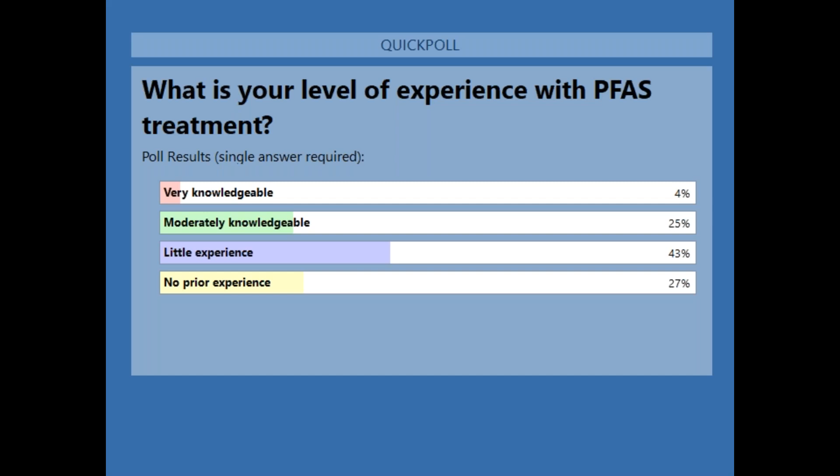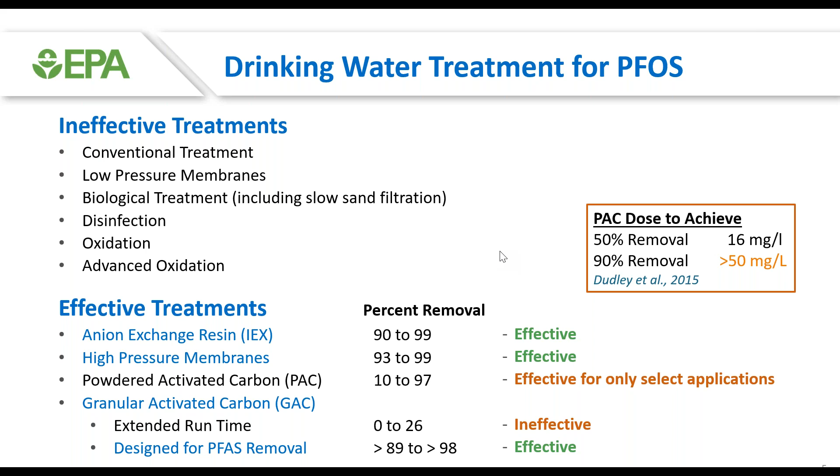But if you're just above the MCL and wanted to drop it down, say 50%, it could be an option. And there are other PACs out there too. If you go to the literature, you can find like super fine PACs that could be used that increase the kinetics of adsorption, and you get better results because it takes it out quicker through your process, and your ultimate capacities are higher. But there is some literature out there on this issue. Just a little bit. Next slide, please.

And then as this is all going on, you can have competition between different adsorbates, natural organic matter that's present that can block the pores or preload onto the carbon. One could even see biological films growing on the outside of the carbon if it's been in place for a fair bit of time. And also at the top part of the carbon, if you're having iron and manganese issues, you can actually plate out iron and manganese on the top part of your bed, which can cause you problems. And hopefully you won't have to backwash. But those are some of the factors that come into play.

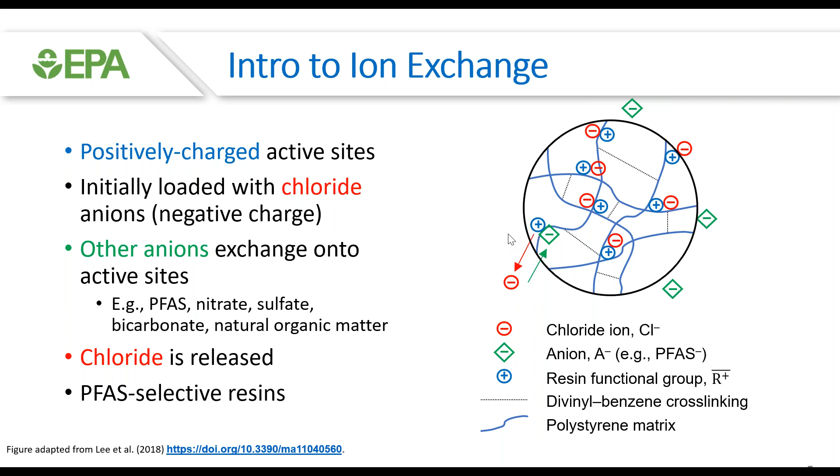However, you can have other constituents like nitrate and sulfate and organic matter that exchange with the chloride also. And so you can have some competition with the absorption. And it depends on what concentrations those are and then what comes into play. But the big ones to look out for are nitrate and natural organic matter. They've shown to be a good or a bad, if you look at it that way, competitor against PFAS absorption with PFAS selective resins. Next slide, please.

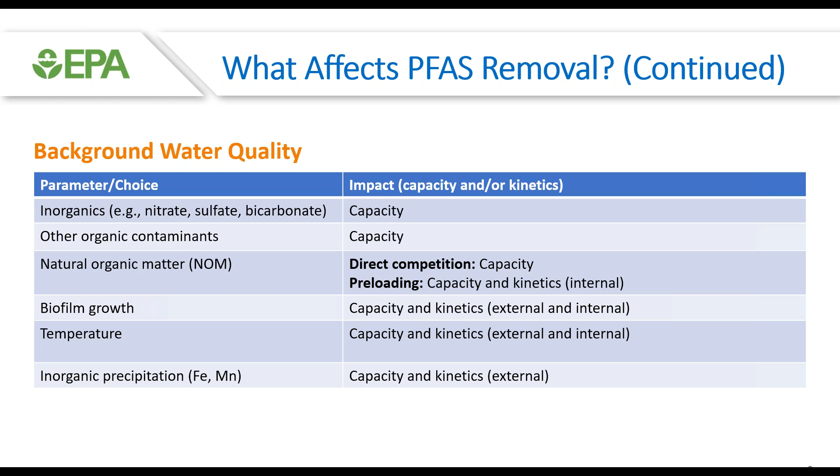For instance, temperature is an issue you usually just can't get around, but GAC works better in colder water than warmer water, just because it's an exothermic reaction, and it favors adsorption in colder waters. Next slide, please. So a little bit about GAC and ion exchange and kind of how the two compare.

So the granular activated carbon empty bed contact times typically range from 5 to 20 minutes, depending on what needs to be done. And the hydraulic loading rates are usually around 4 gallons per minute per foot squared, or 10 meters per hour. And so those are the standard kind of designs. Ion exchange usually has a much lower empty bed contact time, 2 to 7 minutes, and it has a much higher hydraulic loading, up to 8 gallons per minute per foot squared, or 20 meters per hour.

And so what you see is that for some utilities that are very space limited, ion exchange could be a good option if they just can't afford putting in another building, or if they don't have the floor space. And some utilities see ion exchange, assuming that ion exchange works for their mixture of PFAS and their water quality, and they're also integrating into their current system, making sure that all works out correctly. Ion exchange has that benefit of being a much smaller system physically.

And so, however, you should be careful about choosing between the two, because out there in the literature, there's a fair bit of stuff saying one is better than the other just because it has a higher capacity. And that's generally not true. It doesn't have to be true, because granular activated carbon is much cheaper in terms of cost, and in many applications it can be the optimal choice. So one would have to look at it fairly closely to see which is best for any given utility.

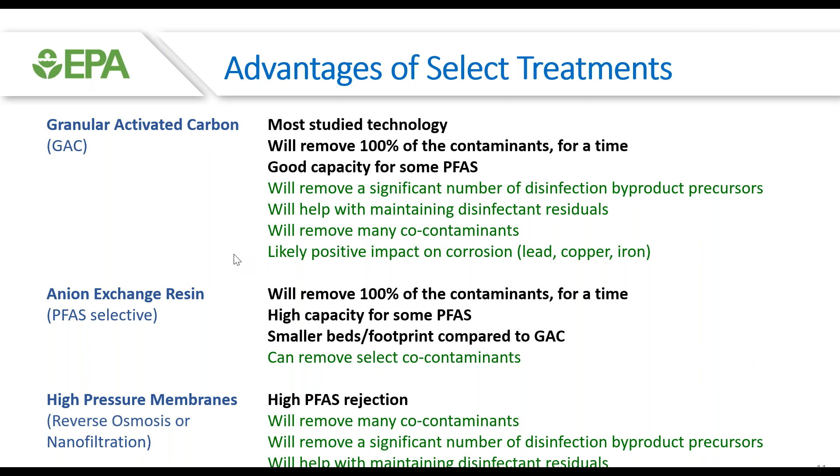Issues to consider with these three technologies. Thank you, next slide. For GAC, reactivation frequency can be very short in some instances, and a utility may find that it's just not functional to have to exchange a bed every month or two. Logistically, it would be a challenge, and it also indicates that it would be very costly in that instance.

With GAC, you can get potential overshoot of poorly adsorbing PFAS, so the weaker adsorbing PFAS can be chromatographed. Oh my heavens, I've said this my whole career and now I can't say it today. It can be pushed forward by more strongly adsorbing PFAS, and what you see is that you can actually get a concentration in your effluent higher than what's in your influent, and that can be disconcerting. So you'd have to keep track of that and make sure it's not going to cause you a problem if that PFAS is a regulated contaminant.

Backwashing for PFAS shouldn't be an issue because the bed stratifies. You wouldn't want to backwash a lot. Usually this is a deep bed adsorber after a particulate removal, after sand filtration. Hopefully you won't have to backwash, but you can backwash and it shouldn't be a problem.

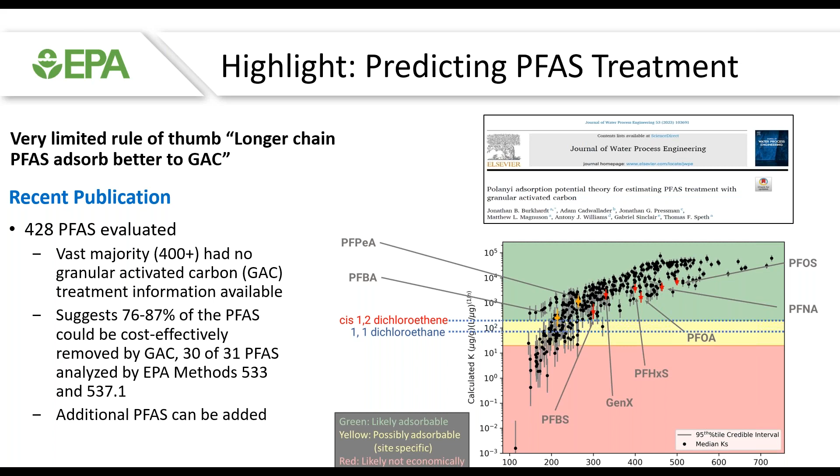But the take-home message on this slide is that if you're looking at a huge range of PFAS, and this correlation could be used for even more PFAS than the 428, carbon will not remove all PFAS. There will be some PFAS that are very weakly adsorbing. The good news is that they're not regulated, and we don't have any health information regarding most of them. But it will remove 76 to 87% of the PFAS we've looked at. So it's a very good technology, but it's not necessarily spot on. And we know of some PFAS that are difficult to treat with GAC, such as PFBA and others that come through very quickly. Next slide, please.

One thing to note is for the non-regulated PFAS and other contaminants that aren't a health concern, one can model these breakthroughs with the current models, and that gives you a much better feel for what the competitive effects are in your water, and you're able to model the expected breakthrough of your more strongly absorbing PFAS that we are concerned about, and it is very helpful for utilities, we're finding. And if you ever need help with that, let me know.

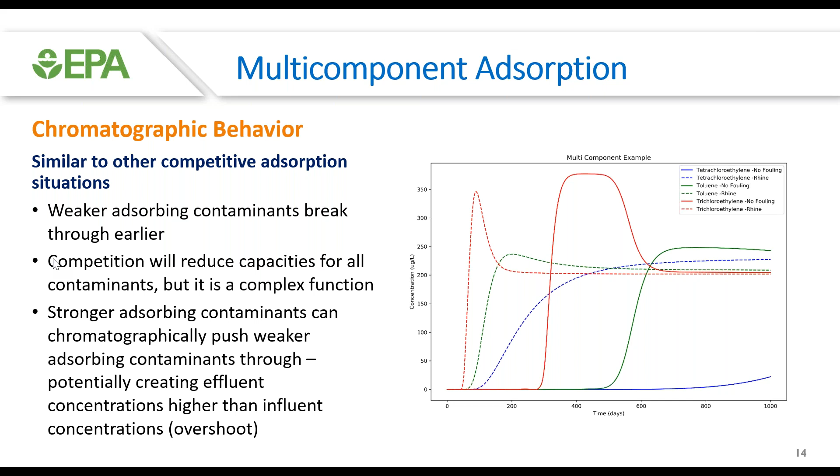A little bit about column configurations. Single columns are often used. However, you lose some of the potential absorption capacity on changeout, because you can only run it as long as you're below the MCL.

You can run staged parallel systems where you start the systems at different times, and therefore you can run the first bed out longer because while that may be above the MCL, you're blending it with water from other columns that are below, at zero. You can maximize your GAC capacity on the first column before you take it off to reactivate it.

Lead lag systems are systems where you have two in series. You fully load the first one, or as much as you can, while the second one catches the PFAS before it reaches the distribution system. Once the first column reaches its high capacity, you take the second column and make it the first, adding a fresh column on the back end as your second, rotating along with valving so you maximize the PFAS absorption capacity.

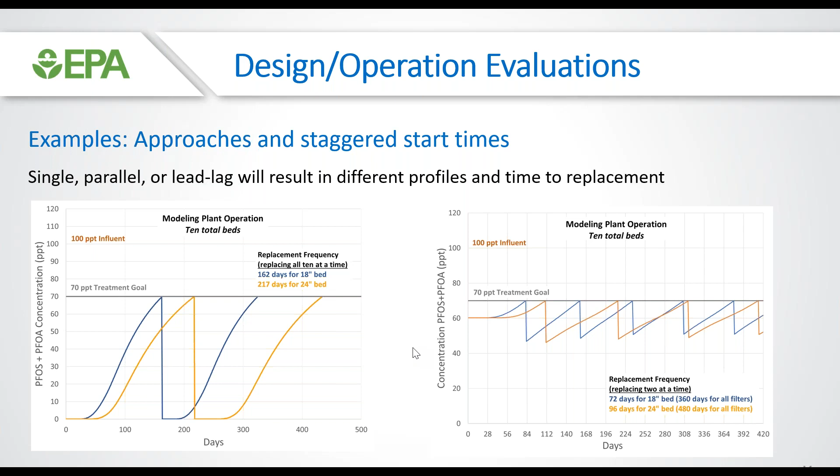Okay, let's talk—next slide, please. I'm sorry, I think I missed the 'next slide please' a couple times, so I apologize. Next slide is the high pressure membrane slide, slide 17. High pressure membranes use pressure to push water through a membrane. You're fighting against the osmotic pressure. The good news is that RO membranes, or very tight nanofiltration membranes, are very effective for rejecting PFAS.

Next slide, please, slide 18. As I mentioned, PFAS rejections are very high for reverse osmosis and nanofiltration membranes, but ultrafiltration and microfiltration, which are used for particulate removal, do not give you PFAS rejection.

The membranes will foul over time, and most systems will add an anti-scalant to prevent fouling or keep it at bay for a period of time. A utility will likely have to do periodic cleaning with a detergent, acidic, or alkaline solution based on what's fouling their membrane. Surface waters, as I mentioned before, foul to a much greater degree than groundwaters.

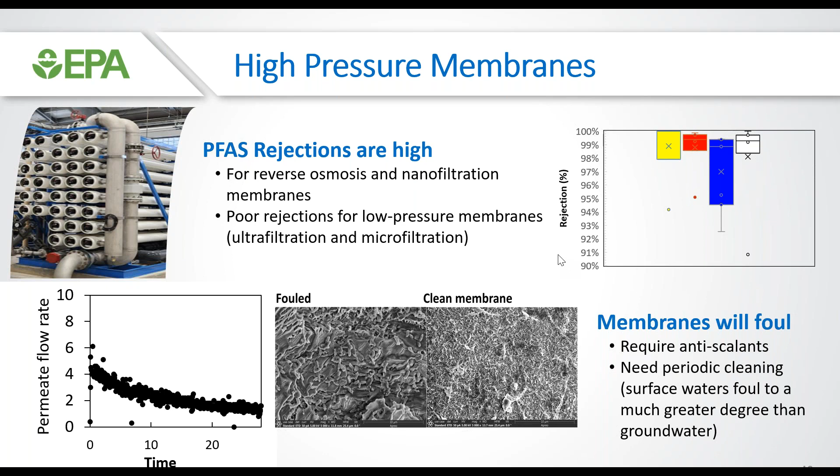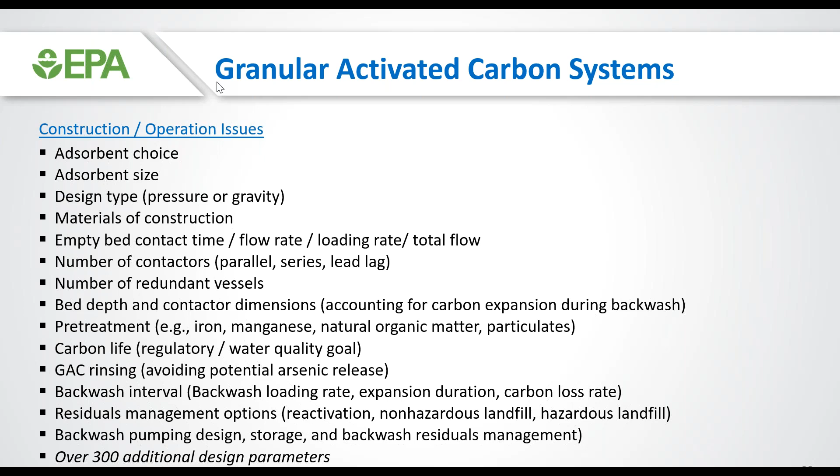So the take home on these three slides are know what you're getting into, all the issues that affect flux or flow rate or absorption. All these things you'll need to know, and you need to know the answers on all these before you can get into the ultimate cost modeling, which is really the only way you can somehow compare these technologies, unless you're running into a utility that has a specific issue that they have to address that really leads you one way or the other. For instance, the space issue for like ion exchange.

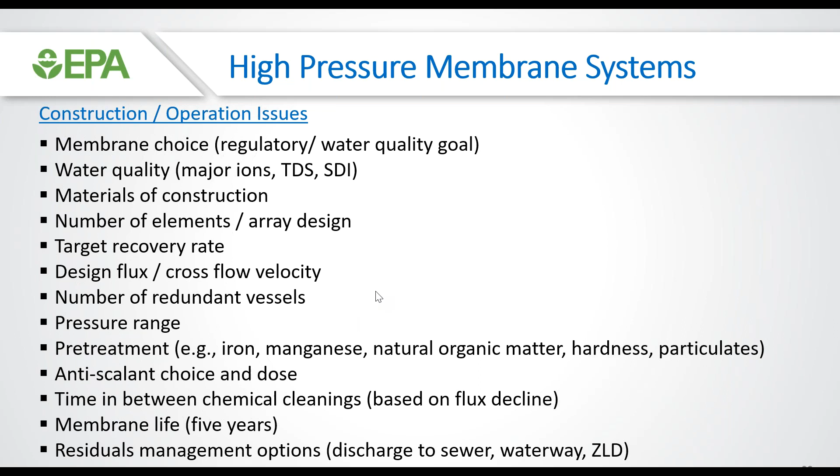Next slide, please. Now, some of these systems, for very small systems, for flow under 1 MGD, you can save money, even though the cost of treatment per gallon treated is higher. You can save money on very small systems because you might not need to do certain things. Like you may have more residual handling flexibility, or you might be able to use a pre-constructed building that you can put in place. You might save space. You might be able to save a lot of space between vessels, and you might be able to use smaller vessels. You largely don't have as much instrumentation for small systems. They oftentimes can be designed with no booster or backwash pumps. You can get away with smaller concrete pad thicknesses and reduced indirect costs. So there are savings for small systems.

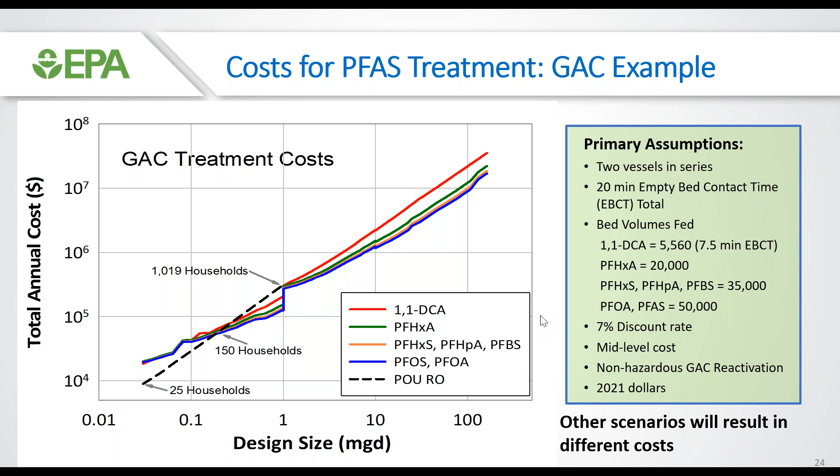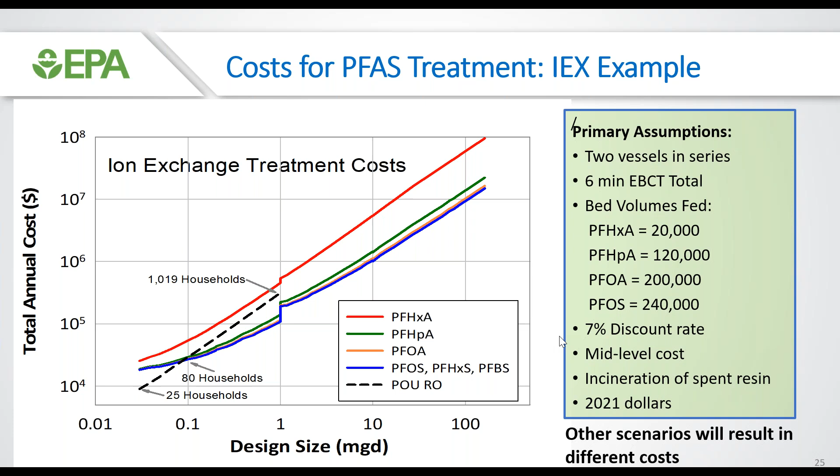Next slide, please. Now, as I mentioned, RO could have a concentrate stream that might have to be handled, or other aspects in terms of things. We are looking at a whole bunch of other technologies, and this is a teaser for the next presentation a bit. If you're adding in multiple technologies, the cost is going to get very high. But there might be some niche in some application where you can put together multiple technologies.

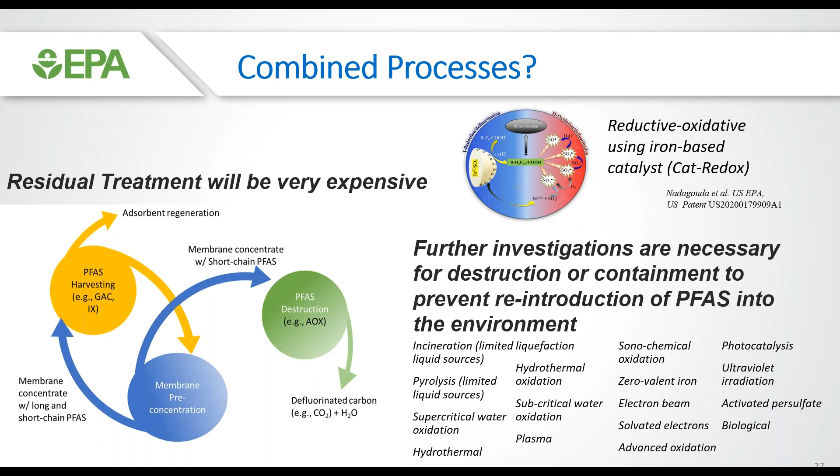Oftentimes systems are put in and built, and then they're sampled for regulatory purposes, but it doesn't give you as much information as you could need for optimizing the operation and maintenance. And then we'll also work with the utilities on their residual stream handling. The goal for us is to develop enough data across the country to develop tools for performance and cost models, make sure the cost models are working correctly and performance models are working correctly, and then to link all that data and materials and tools so that people who have communities with similar water qualities and situations could use the information from our studies set of utilities into the future for the optimization of PFAS removal in terms of operation and maintenance.

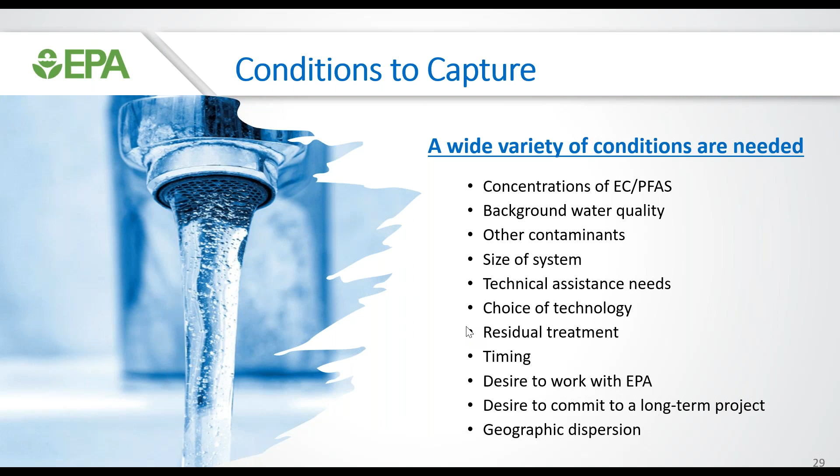So the benefits are that the community gets a whole lot of data on optimizing their system and knowing their system, and then access to tools that are trained on the data from their system, and direct access to EPA technical experts that can help run models for them and go through all the issues that they have an interest in. They could also use the final data for finished water. It's state dependent, but the states we've been working with are fine with it, because it's done in a certified laboratory. They could use the data while we're working with them for regulatory purposes. And if they want to collaborate on publications, especially for those of the local community, EPA will be glad to work with them on those publications.

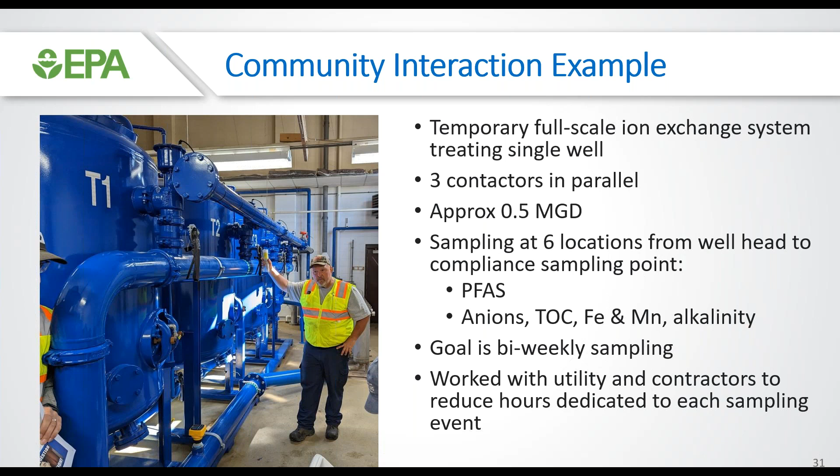Next slide, please, 31. Here's an example of a utility in Wisconsin we're working with. It's an emergency full-scale ion exchange treatment that they've dropped in place for a well, approximately 500,000 gallons a day. We're sampling bi-weekly. We're able to sample the system. We found the early breakthroughs of the early breakthrough contaminants. They were originally worried because they were going up and down and above the initial concentrations. But when we modeled it, it all fit perfectly. And based on that, we've given them a real good feel for how long these emergency systems will last for them. And it's helping them with their final design for their system in terms of where they're going.

The next slide, please. This is just a slide, and I'll go through this quickly because I want to hit the next talk, in that any system that can access the Drinking Water State Revolving Fund is available to this program if you're interested. Give me a call. Even tribally owned systems are eligible. They can use state revolving fund monies. Oftentimes they don't, because there are other funds available. But any system, even say schools and other very small systems that can utilize the state revolving fund can be part of this program. Next slide, please.

And here's just a few places that we're starting. We're starting in Wisconsin and North Carolina and Ohio. We've got systems in Alaska and out in Guam and Northern Marianas Islands. Those systems we're doing a lot there, and the very remote systems we're working with the residual handling especially because they don't have the ability to ship back spent media, and they also don't have natural gas for reactivation furnaces, so we're working with them on their residual handling needs.

Finally, just to wrap up very quickly, the GAC, ion exchange, and high pressure membranes can remove PFAS. There are a lot of other issues. I could talk about this for a long, long time, and as you can see, I'm running even a little bit late here. But there are a lot more issues to talk about, and I'd be glad to talk about it with anybody who has any issues.

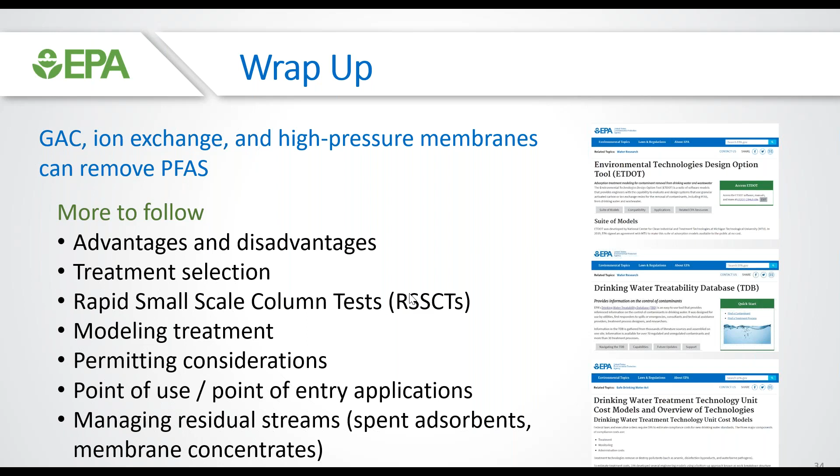So the next slide is just a disclaimer and then questions, but we'll move to the next talk, which I can wrap up in 15 minutes. That shouldn't be a problem. So if we can go to the next slide. Yes? Hey, Tom, it's Hannah here.

While Sarah gets your presentation ready, we've only had one question in the chat, so I think I'm just going to go ahead and ask you now. And I'm also going to send it in our Google Meet so you can read it if you want to see it. But it's from Robert.

He says, in my experience with GAC, we have seen coconut shell media have pesticide and herbicide concerns, and bituminous sourced GAC have metal issues. Can you comment on this?

Yeah, sure. So coconut shell carbons have largely been shown not to be that great for PFAS. I think the pore structure is such that at the end of the day, the more standard bituminous GACs, like the F400 from Calgon, have been basically borne out to be the most optimal for PFAS removal. Pretty much everybody agrees to that.

There can be some minor nuances between one slightly different bituminous carbon and another, but a bituminous-based carbon is the way to go. With regard to metal issues, I think you're referring to, say, arsenic issues. Bituminous-based GAC, because it's a natural product, can have arsenic present in it. We've known this ever since I started in the mid-80s, and it can be very easily handled with an initial flushing.

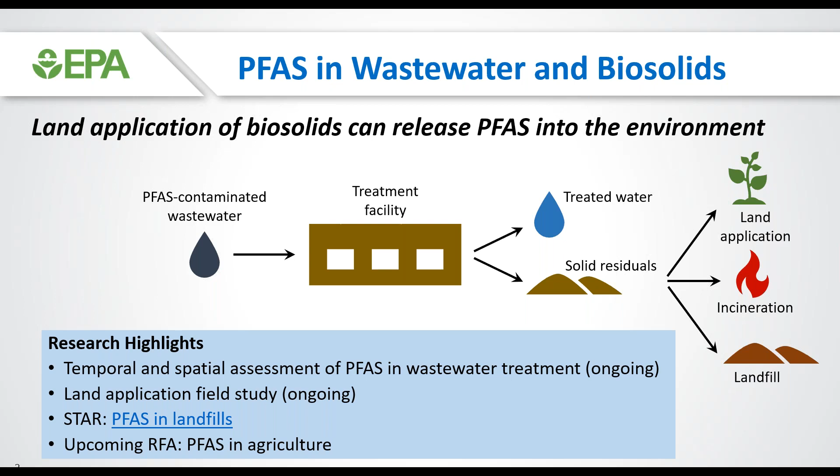Here's a little bit of residual streams, and if it ends up going to the wastewater plant, just note that the shorter chain, or hydrophilic, PFAS will end up in the treated water. The hydrophobic longer chain ones will end up in solid residuals, which then find their way to incineration, land application, or landfill, and you can start the cycle again if you're not very careful.

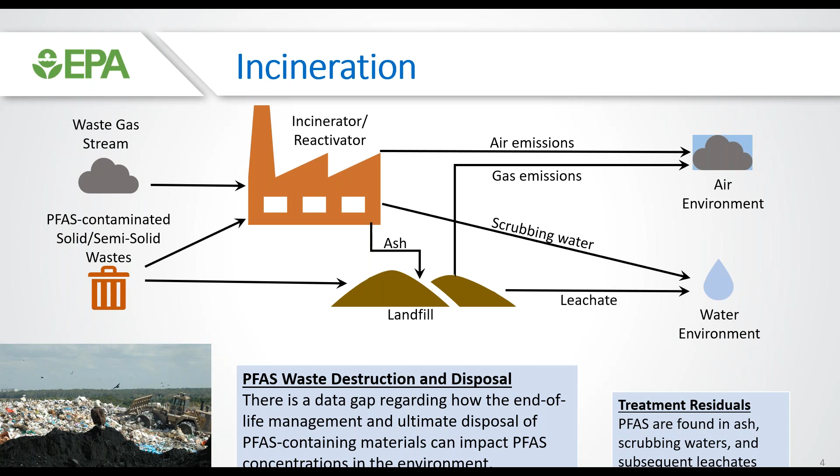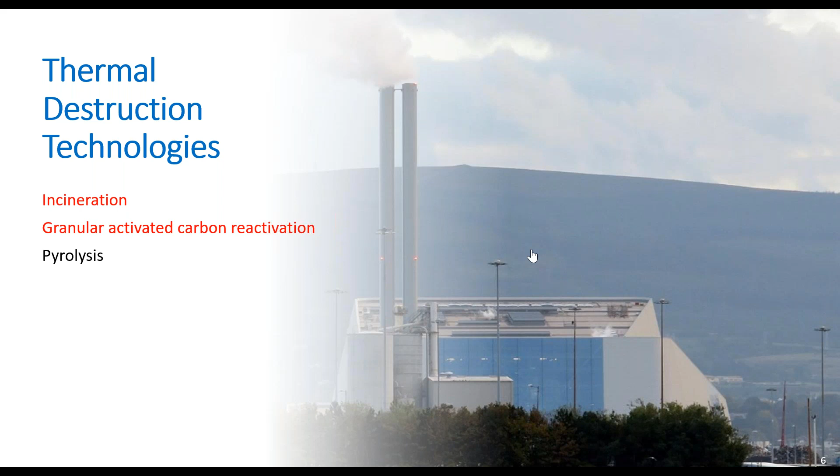This is just a little bit about thermal destruction technologies, and I'll be concentrating largely on incineration and reactivation. Next slide, please. Those are covered in the thermal treatability database at pfast.epa.gov. If you get to the database, you'll be able to see the reference information on the treatment of PFAS in thermal processes. We don't include things like SCWO and HALT, but largely the processes that specifically use heat to destroy the PFAS.

Next slide, please. Why that's important is that the carbon-fluorine bonds in PFAS are particularly strong, and the most difficult one to destroy is carbon tetrafluoride, which requires about 1400 degrees C to achieve 4 logs of destruction. That, along with C2F6, can be used as potential surrogates in a thermal system. For the regulated PFAS, we're looking at numbers somewhere around 1100 degrees C for a good percent reduction without PICs. And that's the key here: we don't have a lot of field data, and the field data is lacking a lot of information on products of incomplete combustion.

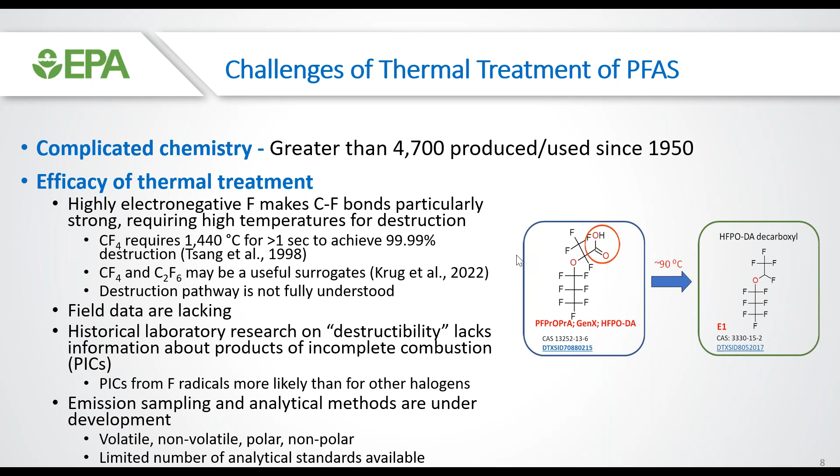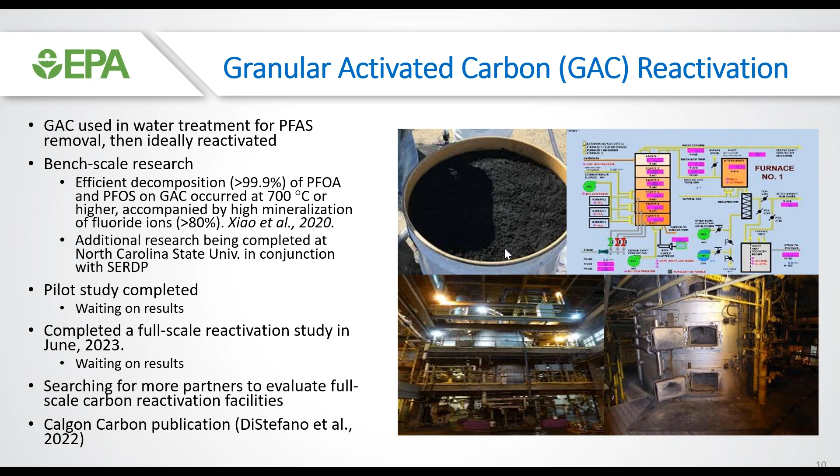As an FYI, Calgon Carbon published last year on reactivation of GAC, largely for the known PFAS. And if you're interested, it's that DiStefano reference. Okay, next slide, please. A little bit now more about managing PFAS. And this is a paper that was done last year, and I'd recommend it.

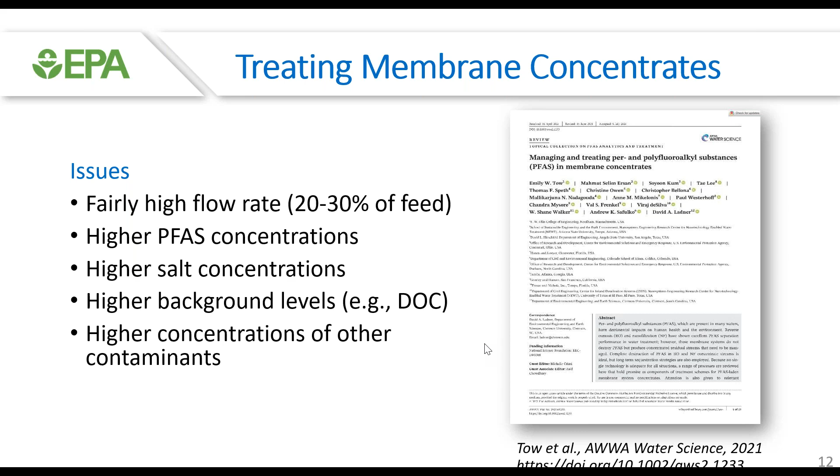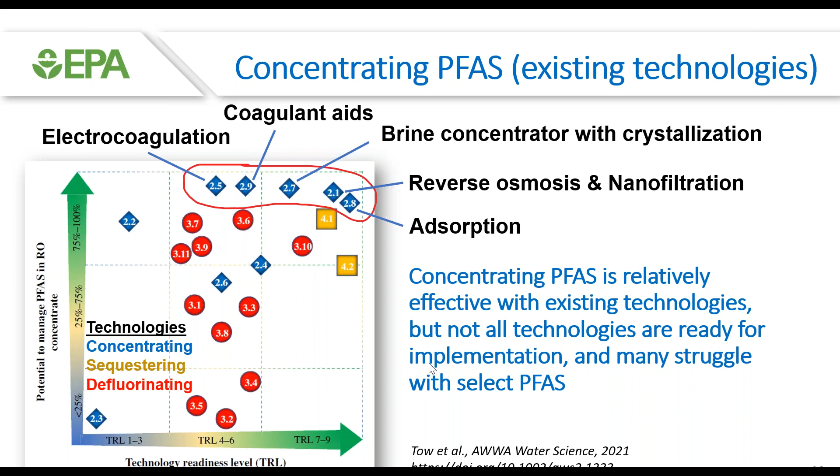Next slide, please. We know that concentrating PFAS with adsorption, reverse osmosis membranes, or more unique membranes, membrane distillation, or forward osmosis, those kind of skew along the range of whether or not it's ready or not. But it can reduce this issue of concentrate treatment. And you can get into brine concentrators and crystallization, heading towards zero liquid discharge. And also, as you go down the list, for things that aren't quite ready yet, is electrocoagulation and coagulant aids. But if you're looking for treating the RO concentrate, the first one on the list is either using other membranes to concentrate it even further to the point where you can manage it, or use adsorption of one type or another. The advantage is you can use a more novel adsorbent that maybe isn't NSF certified for drinking water for this capability.

Next slide, please. For treating other types of concentrating factors, the other blue ones, you get into evaporation ponds, foam fractionation, which is moving forward fairly quickly now. The question with foam fractionation is at what concentrations is it really effective in the system, and more data is being generated on that. And then you have other things, and I mentioned this before. I mentioned it skews with some of the other membrane systems for membrane distillation and forward osmosis. They're not quite ready for prime time, so they're further there on the left. And on the very low bottom end is electrodialysis and RO hybrid systems. So that has a lot more to go before one would consider that.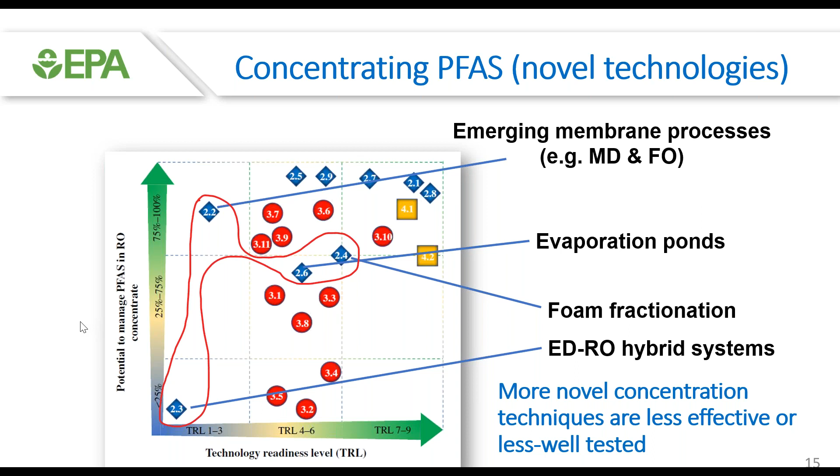Next slide, please. This is just foam fractionation for those that don't know. You bubble air through your water in one way or another by pulling a vacuum or pushing air through it. And it's a lot like air stripping. And PFAS love to be at the interface of the air to water. And so when they get to the top, it foams up in a sudsy foam, and you can kind of scrape it off or suck it off. And that can be very effective, especially for long chain PFAS, and could be used as an RO concentrate treatment, or if you have an extremely high concentration in your well, you might be able to use it as a pre-treatment to your primary treatment system. And that's probably more for cleaning up hazardous sites as opposed to drinking water systems, because the concentrations do need to be high.

Here are the defluorinating PFAS technologies. So incineration, plasma-based treatment, sonochemical, electron beam, supercritical water oxidation.

Incineration is possible, but you can't incinerate 30% or 20% of your feed flow rate. So you're going to have to knock it down for that. And the other technologies aren't quite ready for prime time. But it can be helpful, but none of these technologies are 100%, not even electron beam where you're just zapping it with electrons. Next slide, please.

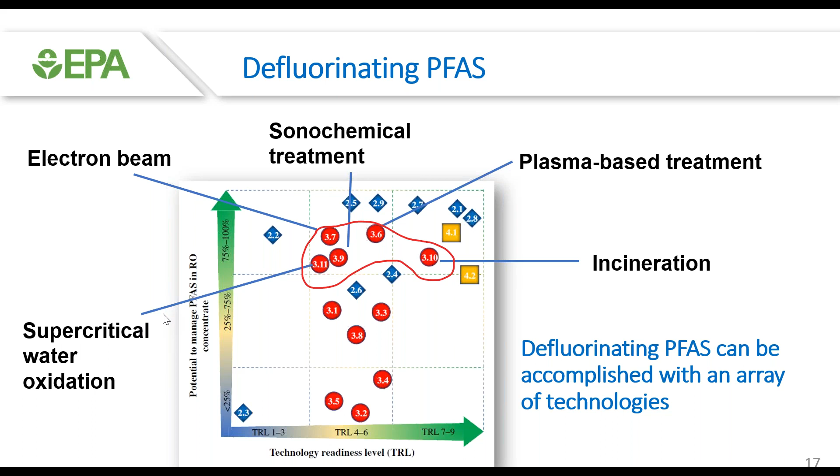Supercritical water oxidation is something that's very promising. We don't know about it in terms of an RO concentrate stream. That's a continuous stream. But for batch type streams or very low flow rates, it could be possible. We've piloted it in a number of different situations, and we're going to be running one shortly, looking at sewage sludge actually. But it's a promising technology, but not necessarily for RO concentrates.

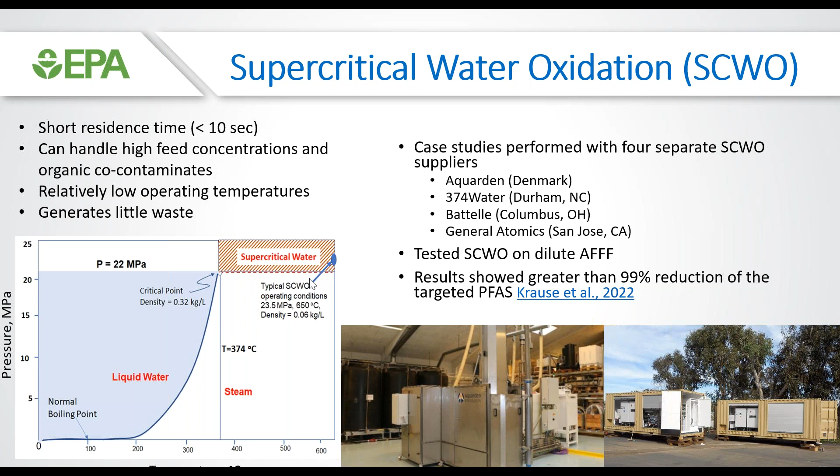Electrochemical oxidation. This is another technology, as you can see by the picture. It's just being worked on largely at the bench scale. There are some piloting systems out there, but we've tested it. It seems to work well for certain PFAS. There are always breakdown products on that. And so that's another technology that's being studied.

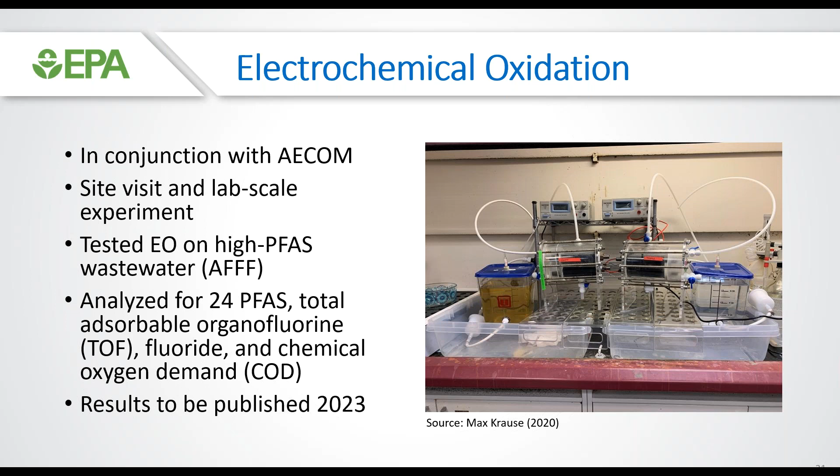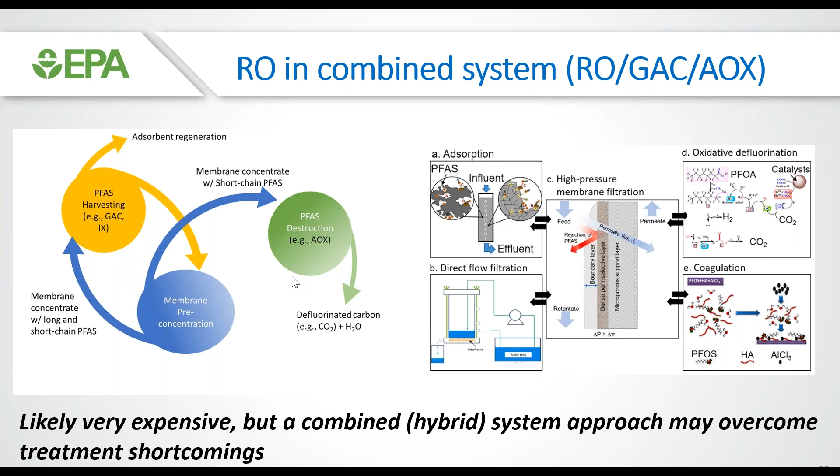So I'd like to just now acknowledge the next two slides as my EPA co-authors, and then the co-authors on that paper that I referenced. And then it just ends up with a disclaimer and the questions. So I apologize for kind of going through this. As you can tell, I could probably talk about this topic all day long. And I hope it's been valuable to you. And I know there'll be a time at the end of the whole thing that we could answer more questions, and I look forward to that.

Thank you, Tom. We do have one question that's come in, and since we are just a couple minutes late, why don't we go ahead and do that one now? Hannah, would you be able to read that one, please?

Yes. Hi, Tom. We have one more question, and the question is, when GAC is used for PFAS removal, is there any data to show what happens to PFAS during the GAC reactivation process? Is it completely removed during reactivation? And I'll go ahead and share this in the chat so you can read the question as well.

Yeah. So we've looked at that a fair bit. On the bench scale work, we funded a couple of universities to do this work, and are continuing it. At the bench scale, it shows largely all defluorination to hydrofluoric acid. But at the bench scale, it's a very controlled system, and you can kind of get those results. But the good news is that it appears very clearly that activated carbon, when you heat it up to reactivation temperatures, which are below 1100, the functional groups on the activated carbon work as kind of a catalyst to help destroy PFAS.

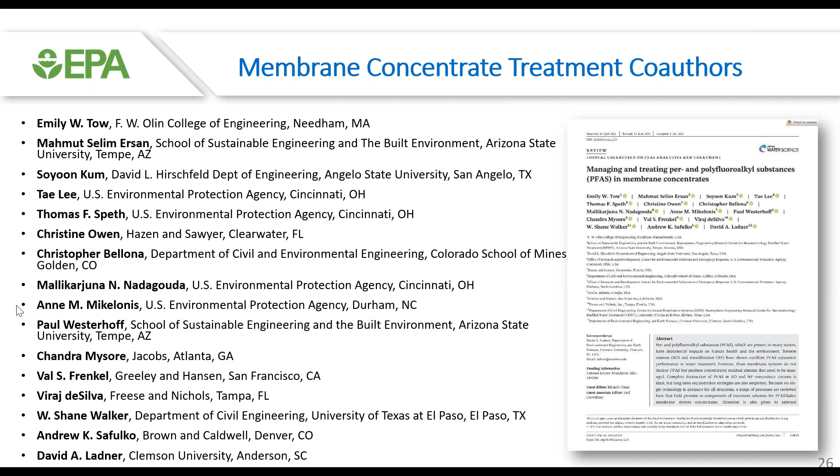All right. All right, Yasmina, are you there? I don't hear you. Yasmina, are you having any issues? Are you muted, Yasmina? I'm still not hearing you, Yasmina. Okay, looks like Yasmina is going to come in again. She is our speaker for the next 2 hours, so let's give her a minute to see if she can get back on. If not, we may take our break a little early and troubleshoot here.

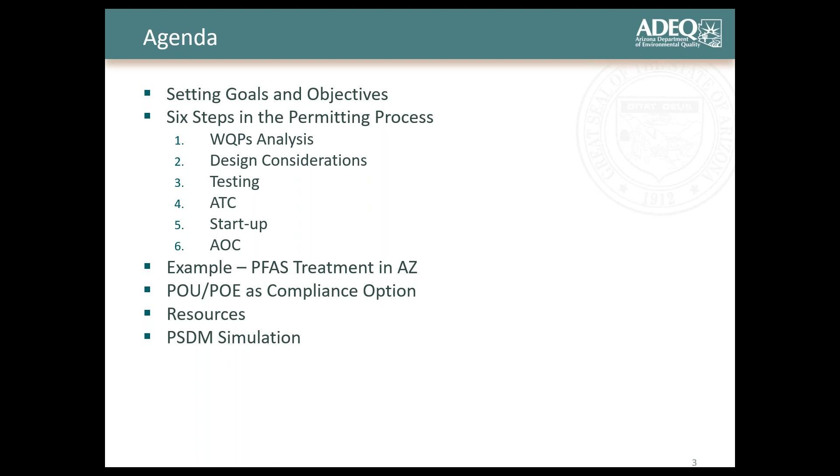So let's get started with goals and objectives. I found it important to step back here and say that before starting to think about treatment at all, be aware that treatment is not always the best approach. Non-treatment alternatives such as consolidation, interconnection, or deeper wells may be a better option. And here are some reasons for that. So these non-treatment alternatives can be faster, more cost-effective, and more sustainable. You will not have a long-term O&M consideration to think about, or limitations for technical, managerial, or financial capability, as in the case of treatment.

For purpose of this training, I will assume that non-treatment alternatives are already explored, but for some reasons not working for you, and you are starting to think about treatment options. From ADEQ point of view, high level of PFAS treatment goals are long-term compliance and simultaneous compliance.

We understand that there are both positive and negative specifics related to PFAS. So while we have known treatment technologies and grants are available to support robust design, certain gaps do exist. So this is still new contaminant for us. We are dealing with very low concentration, so we are basically targeting non-detect. And there is a general lack of experience in all the fields related to PFAS.

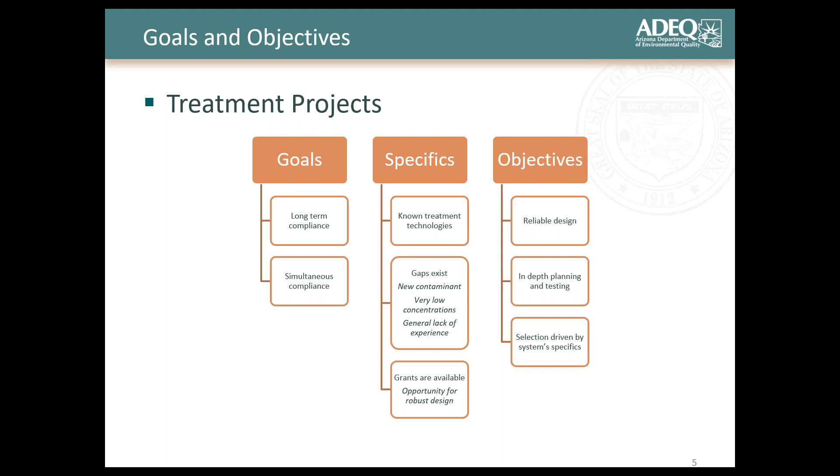So in order to meet goals in line with these listed specifics, we see 3 main treatment objectives. First, design must be reliable. Second, in-depth planning and testing is needed. And third, selection should be driven by system specifics.

After all, treatment selection shall be driven by system specifics so that final product is reliable and easy to operate, and it should avoid and prevent foreseeable mistakes. And of course, it should be cost effective. But when we say cost effective, it's not only about the capital cost, but you also have to think about balanced capital and long-term O&M costs.

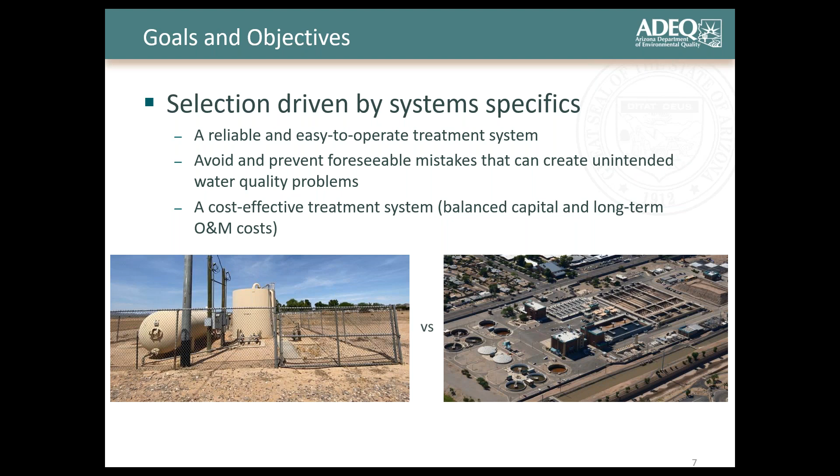So in Arizona, we have very small rural systems, such as the one on the left side, but also big ones shown on the right. While they may have same PFAS issues, their optimal treatment selection and design will not be the same because of their specifics.

I will now start with permitting process. And even though this process is nothing different than what we have for any other treatment and contaminants, I will show here a recommended cadence of activities needed to meet minimum design criteria, with emphasizing differences specific to PFAS.

So you're all familiar with ATC and AOC steps in ADEQ permitting process. However, there are activities that you do before and in between ATC or AOC, and I will talk about all of them. So our goal is that you come prepared for ATC or AOC so that you do not risk denial. And that's why, in addition to these general type trainings, we highly recommend scheduling pre-application meeting with us where we can answer all of your questions and determine if your specific project is ready for ATC or AOC submission.

So first activity on previous chart is analysis of water quality parameters. This should not be surprising for anyone because you have to know what you have in your water in order to plan how to mitigate that. Questions that I thought that may arise specifically for PFAS as a new contaminants are what to test, where to test, and how many tests to do.

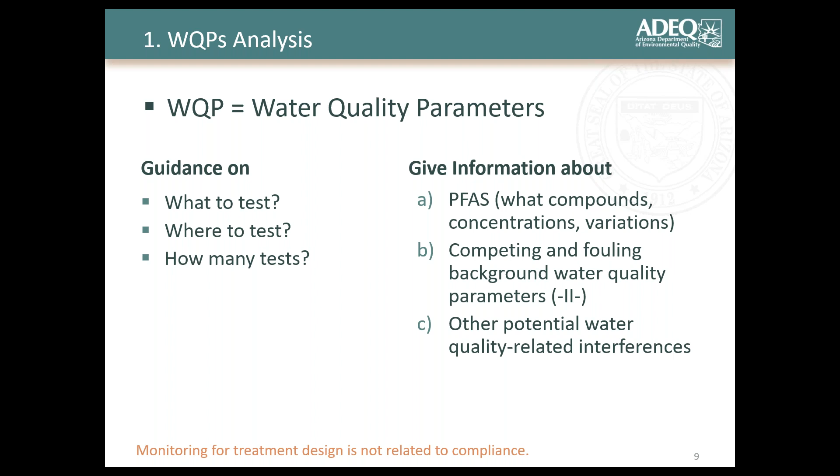And you have to know answers on these in order to provide crucial information for your design, such as what PFAS you have, what compounds, in what concentration, and what is the variation in them. Then beyond the PFAS, you have to know the same for competing and fouling background water quality parameters. But even beyond those two groups, there are other potential water quality interferences that you have to test for. So let's focus on PFAS only.

There are three things that you have to know about PFAS in your water. First, you have to know speciation. And why is this important? It is important because you have to make a difference between short chains and long chains, because longer the chain, stronger the hydrophobicity and lower the mobility. So that's why you can see that it is easier to remove, general trend saying that it's easier to remove longer chains than shorter chains.

Then you have to know what's the functional group that you have in your PFAS, because stronger the head charge, it's easier to make the bonds with media. And I guess I can give here one example. You probably already know that it's much easier to remove PFOS in comparison to PFOA. So there is only that functional group that makes difference here. So it's very important to know which one you are dealing with, what you are targeting.

And then you have to think about the potential for future regulations. You are screening for 29 compounds, either if you are looking at those screening results from UCMR5 or ADEQ testing, you are testing for 29, and we have 6 of them that are proposed for regulation. So I really recommend to observe all of them.

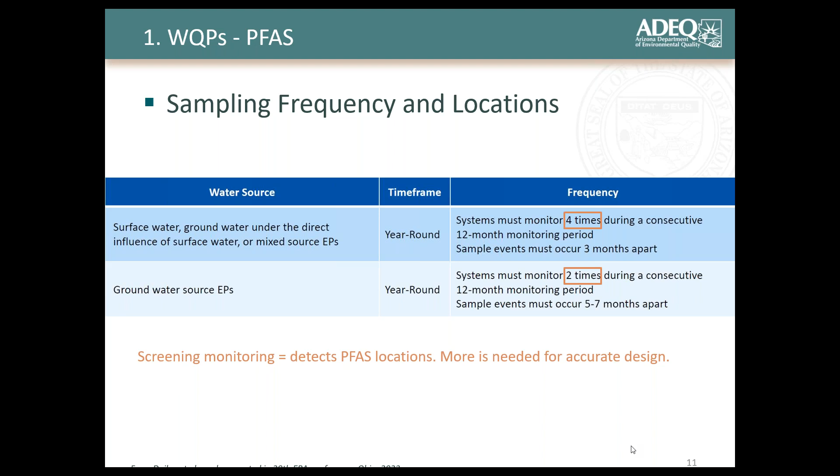Okay, this seems to be a mistake. This slide was not supposed to be here.

There are other things in your water beyond PFAS that should be analyzed due to potential negative impact. We have two major groups of interferences here: one is competing parameters, and the other one is fouling parameters.

Competing is important because it affects capacity for PFAS, because if you have many contaminants competing for the same sites, adsorption sites are limited. It's very important to know what is competing and how much of that you have, because there's only a limited number of sites available.

That's why it can drive trade-off decisions. For fouling, it's important because fouling is basically clogging your pores. If you clog those pores, you are basically blocking those adsorption sites, affecting media capacity as well. You also increase O&M activities and eventually cost, and fouling can require treatment to avoid frequent backwashing.

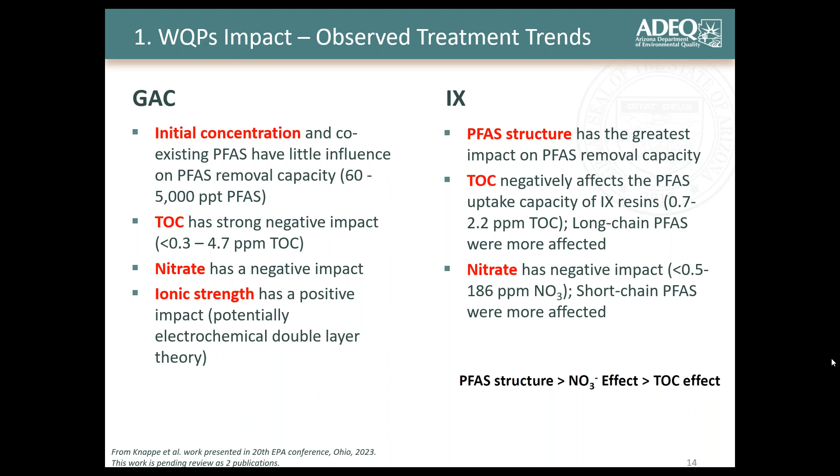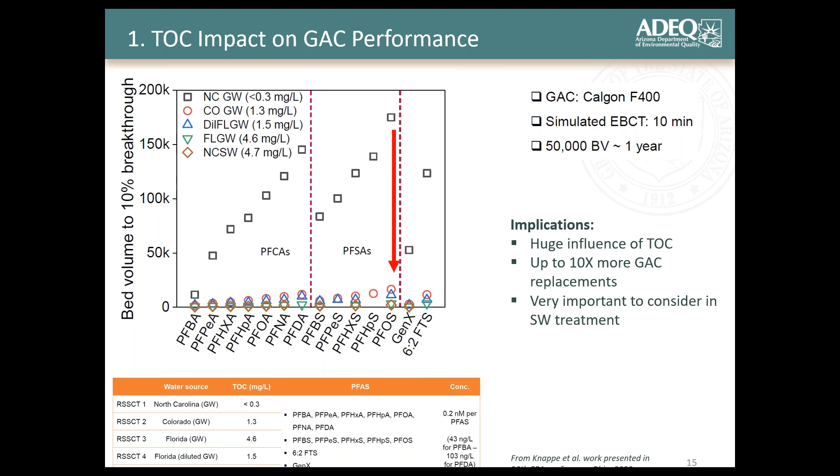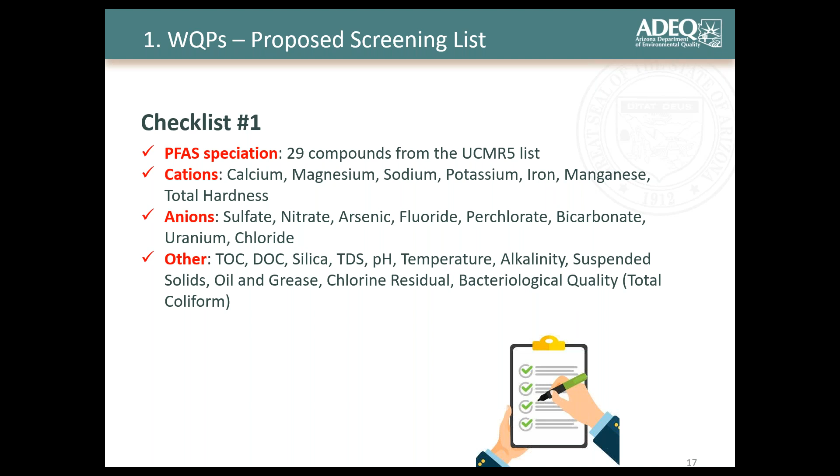And now we are going on second permitting step from flow diagram that I showed, and this one is called design considerations. So this topic is broader than first one, and its purpose in general can be covered by 3 questions that this step should provide answers to. So first, how to design for specific outcomes. Then what to consider as potential system limitations, and how to get rough cost estimates. So at the very least, these answers should be based on a system-specific analysis that includes following items: existing conditions, operation, residual management, applications, implications, and cost estimates. And I will talk about all of them in next slides.

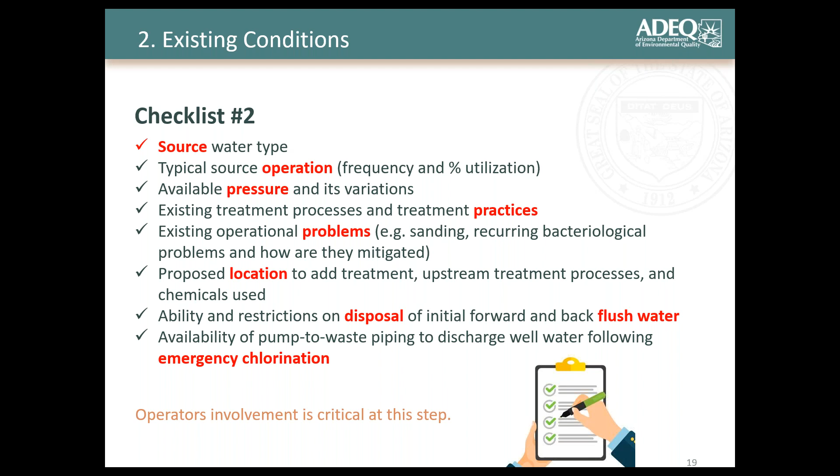And due to different mechanism characteristics, selectivity and kinetics of these two technologies may simply rule out other options. In terms of selectivity, GAC is not a very selective technology, and we mentioned that many times so far, and as such is less effective for shorter PFAS chains. While ion exchange is a synthetic material with specifically designed functional groups, and that's why it is effective for a wide range of PFAS. This means that PFAS speciation may really drive treatment selection.

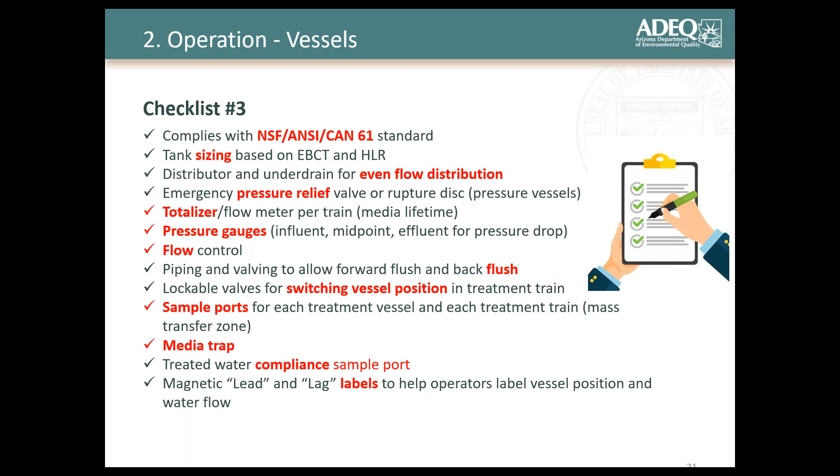Second, regardless of treatment train number, you have options for parallel or lead lag operation. This decision is a trade-off between complexity and efficiency, and I would say also safety, because a lead lag system will increase media efficiency, and it also is going to provide an increased margin of safety. In line with that, it will help you with managing chromatographic peaking that is very significant for PFAS. And I'm again going to talk more about that in the next few slides.

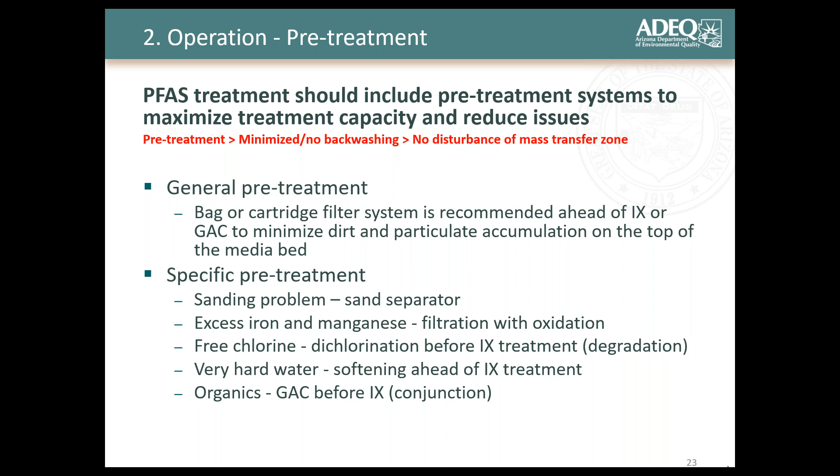And if you have organics, maybe you want to consider to have hybrid approach and, let's say, combined GAC and ion exchange vessel. So have a GAC as a pre-treatment here for ion exchange, or have lead lag where lead is GAC and lag is ion exchange. So just to add here that disturbance of mass transfer zone is one of the reasons why the gravity basins that have frequent and intensive backwashing are not recommended for PFAS.

So we are done with the operation and going now on another item under design consideration, which is residual management. So there are 5 categories of residue that you potentially have to design for. These categories are spent media. So if you have GAC or ion exchange, that spent media will contain PFAS. Then the second category is concentrate reject water stream, and we are talking here about your waste from reverse osmosis or nanofiltration, and those concentrate stream will have very high concentration of PFAS, of course.

Then third category of residue might be your initial flush water. So basically, if you get a media that was not flushed by the vendor, you have to do that on site. So if you have ion exchange in that flush water, you may expect to have some VOCs there. If you have GAC, it will probably be some arsenic in that initial flush water. So you have to have a way to manage that. And then fourth category is backflush water. And we do not expect to see here any PFAS because just backwashing should not be strong enough to do desorption. So there should not be PFAS, but yes, you will have fine particles.

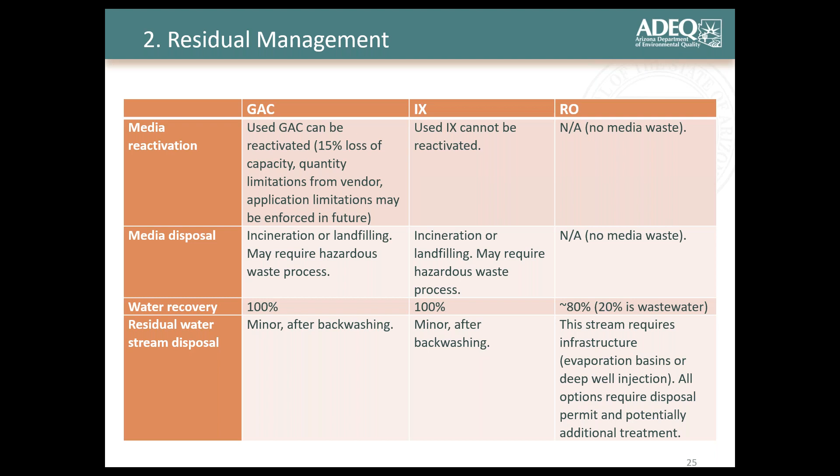So here is a short summary focusing only on PFAS spent media. Basically, every basis of design for any PFAS project shall analyze quantity of waste, logistic, and cost associated with that. There are only two existing options for PFAS media residual management, and those are landfilling and thermal destruction, where we have reactivation and incineration. Unfortunately, there are issues associated with each of them. So for landfilling, we have that proposed hazardous designation, and we don't have any hazardous waste facility in Arizona. I think that the closest one is in Nevada.

Then we have general lack of data. So we don't know too much about destruction pathways, and then we are missing that field data that Tom mentioned, and we also need to know more about emissions. If you think about thermal destruction, only specialized facilities can do that because of that high temperature requirements. We have a Calgon Carbon facility in Arizona, and we are going to work with them in the future to get more information about this. But you should also know that this approach might have some limitations in the future.

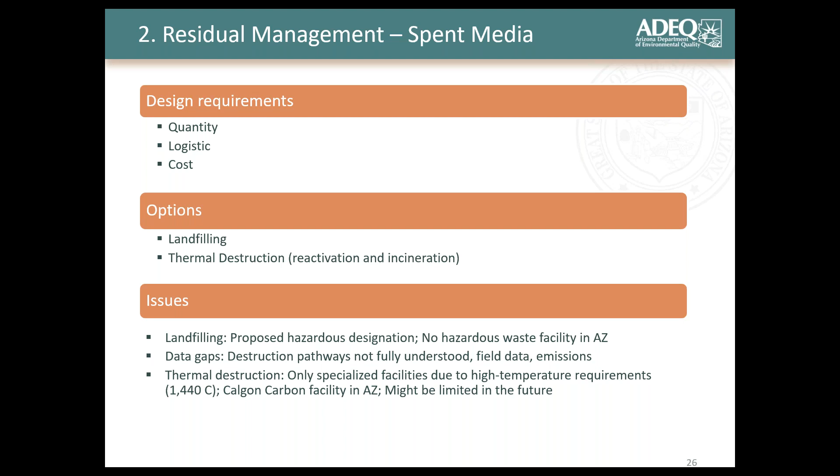So we are going on to the next topic now, and that is also under design consideration. We are going to talk about application or utilization of the same treatment for PFAS, but also for other co-contaminants. So instead of saying yes or no for this approach, let's start with a treatment overview. We have GAC as the most practiced technology in the US, ion exchange, something less, and finally reverse osmosis, which is very rare in non-coastal states such as Arizona.

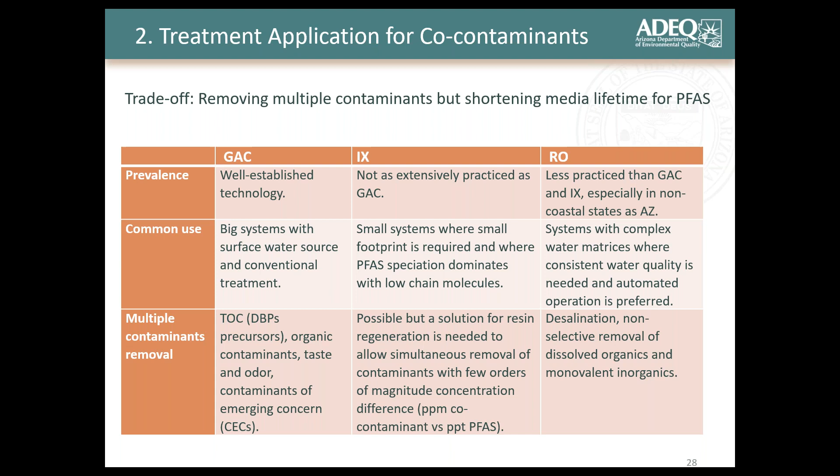GAC is more common in big systems with surface water source, where its goal is really TOC reduction, while ion exchange resins can be seen in small systems on groundwater that have issues such as nitrate, fluoride, and arsenic. In regards to PFAS, it can be expected that big systems can still use GAC if they have to remove long chain PFAS compounds. However, due to the high TOC competing impact that we mentioned before, it is likely that additional GAC vessels will be needed at the end of treatment trains to address PFAS specifically. And similar is with ion exchange. While small system footprint and short chains can dictate ion exchange application, PFAS will likely require additional ion exchange vessels because regeneration is usually not recommended for PFAS, while it's crucial for ppm contaminants.

After application, another thing to consider is implications for simultaneous compliance. There are at least 3 potential impacts that installation of PFAS treatment can cause. First, for corrosion control, installation of reverse osmosis will have an extremely significant impact and will require some mitigation measures. Ion exchange will change the anion ratio and cause a pH drop, but luckily this impact seems not to be long-lasting according to recent publications. On the other side, GAC will probably be beneficial for corrosion.

Then the second thing to think about is microorganism colonization. This can happen with any granular media or membrane technology and must be managed, which is usually done by addition of post-disinfection. Third, chromatographic peaking, that is also called dumping, is generally associated with granular media technology. This phenomenon is, however, significant for PFAS, and it will start to leak out as a result of co-contaminant push impact. Let me show you more details about that.

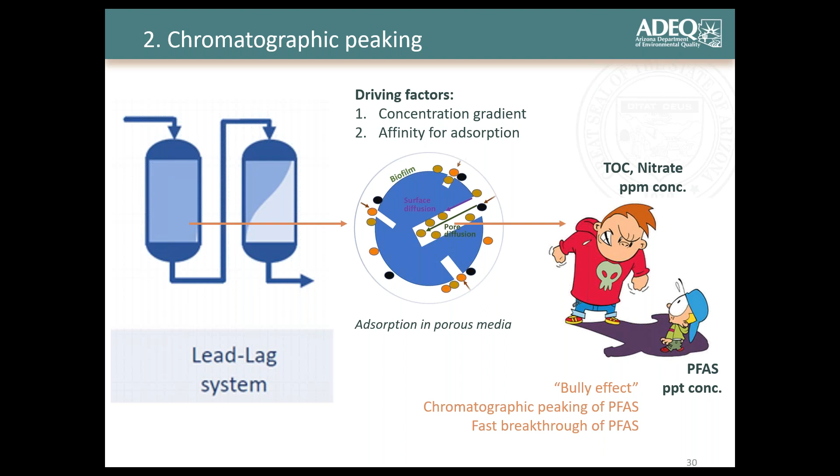And the last aspect of design consideration is cost estimate. Cost estimates in the early phase of design are part of conceptual design, and the purpose of doing one is to really narrow treatment and design options and check for TMF capability of the system. Even though this can be done in many ways, I assume that each firm has a preferred way of doing that. ADEQ recommends use of cost models prepared by EPA that are free of charge and have options for non-treatment, but also for all 3 treatment technologies recommended for PFAS.

At the moment, we are working on updating this model so that they use Arizona-specific cost for 2023, and also are specific for made in US materials. And also, we would like to see update with displaying more details in the output tables. However, this is work in progress at the moment.

And I can say here that if you use these EPA models, you will significantly simplify comparison between mitigation options and have easier and more straightforward communication with ADEQ.

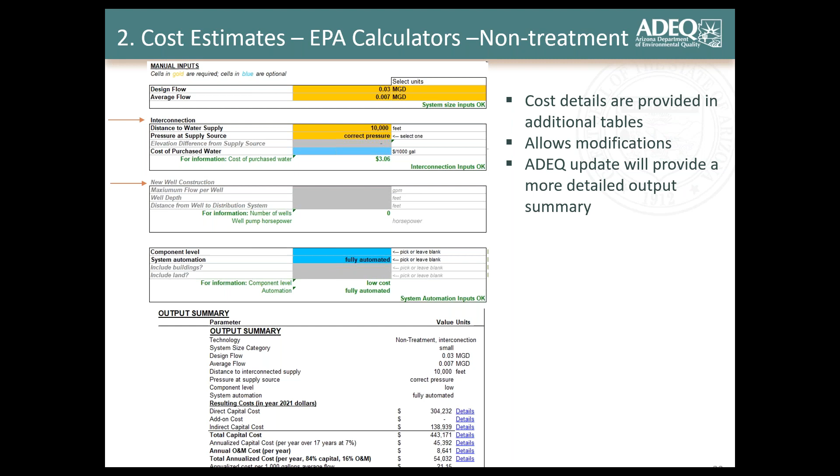Calculator for treatment is similar, but you have to put here more input information. And what is very important is that you may select between a non-hazardous and hazardous option when planning for residual disposal.

And here is the moment when we plan to have a break. So Sarah, can we check a time and see if this is doable? Hi there. Yeah, so we'll be taking a break and we'll get back at 10:15 and begin again. So it's just about 10 minutes. So yeah, we'll see you back at 10:15. Thank you.

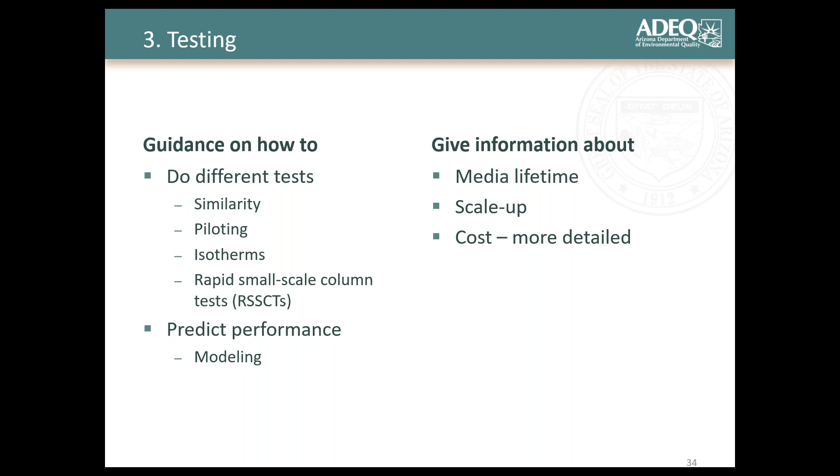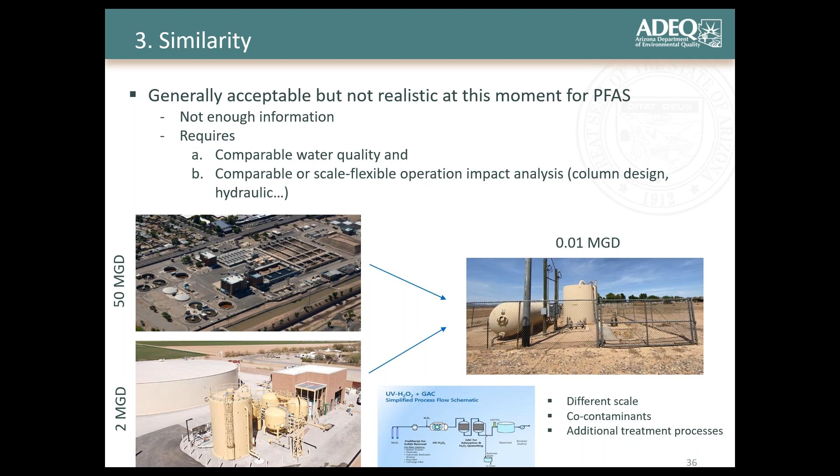And let's talk now about pilot testing. Even though this is not the first on the roadmap, I'm starting with this because it is the most conservative method to confirm treatment performance. As a result of this testing, you can get a bunch of good results, but it is also important to define issues that do exist even here.

So this type of testing is time consuming. You probably have to plan that if you want pilot testing, you need an additional year to do this. And this is because we are in PPT concentration and that volume is usually more than 50,000. Then it's not just that it's time consuming, it is cost intensive. And you are actually doing very limited testing here. So what you select here, for that you will get results.

So it's very important how you plan for this, because your results will be good only for the preset hydraulic loading rate, empty bed contact time, for that selected media, and so on. So here, after you're done with this, you are very limited with the adjustments. So be very careful. And this is why pilot testing is not the first one on the roadmap. So it really should come after you have a bunch of other information.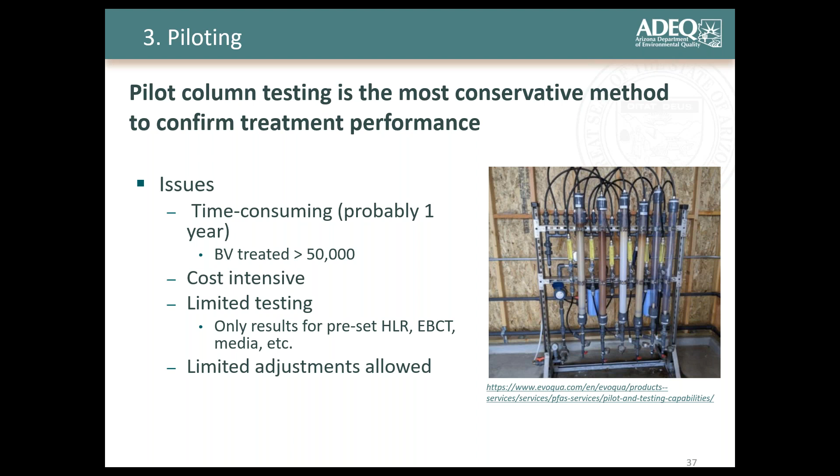Another type of testing is rapid small column tests, which is actually scaled down pilot testing, where you reduce empty bed contact time to shorten running time and get fast results. Again, here is a list of issues with this type of testing as well. So the first one is scale down adjustments. You usually have to grind the media, and when you do that, you can affect kinetics.

And I really have to say here that this is still considered to be very controversial, even though this type of testing has been around for many decades, and it showed to be good for PFAS, but also for many other contaminants. But still, somehow it seems that there is an issue with trust here. So, as I said, the scale down approach is what makes this type of testing difficult.

So you basically have to speed up the breakthrough curve, but stay in some kinetic boundaries so that your results are still useful for full scale. So there are two options here, either to grind media and shorten empty bed contact time, and this is the more common approach, or to skip grinding, and then your design has to be more careful. You design the column to still meet hydraulic number requirements, run at lower empty bed contact time, but the same hydraulic loading rate that you have at full scale, and then eventually predict performance at full scale with the help of the pore surface diffusion model, about which we are going to talk later.

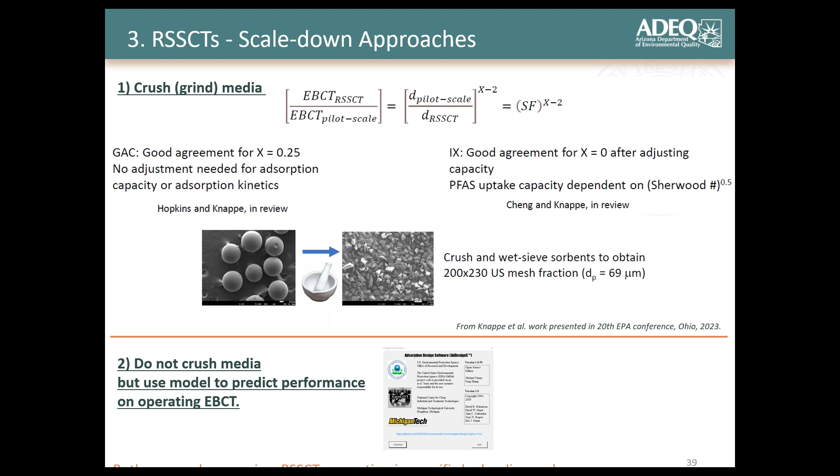And the next type of testing that I have here is isotherms. And this is the most simple media testing. So the purpose of this testing is really to get equilibrium parameters. So when you reach that equilibrium, you can make a comparison of maximum capacity between different media, and that way you can make that media selection. So when you have that media selection, you can really use that in many ways.

I would say the best approach would be to run isotherm testing before you start doing your pilot testing or rapid small column testing, because you can start with, let's say, 10 media. You can do isotherms for them and eventually select 3 or 5 that have the highest capacity for your source, and then keep doing more complex testing with them. Beyond that, you can also use this testing to collect Freundlich parameters that are very important for the model approach.

The basic testing protocol here is that you can vary adsorbent weight or PFAS concentration in a constant volume of water. You have to have continuous constant mixing, very low, like 30 to 50 rotations per minute. You want to avoid attrition. And then the name is telling you, it's isotherm, so you have to keep a constant temperature. If you have variation in temperature, your results won't be representative.

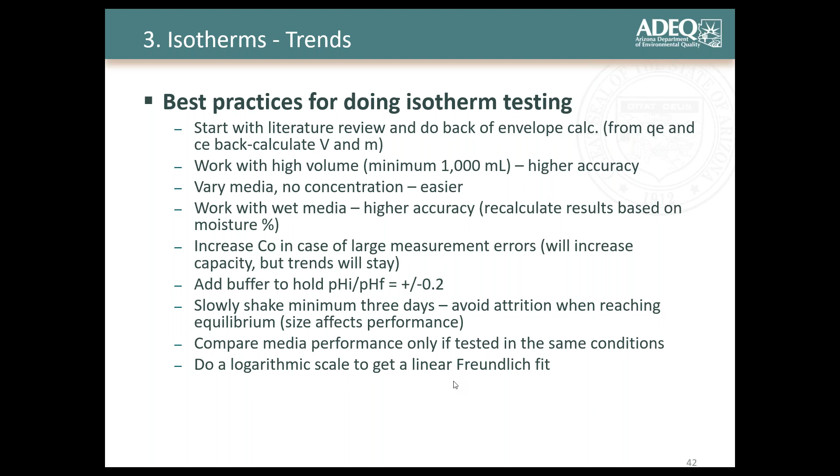So the next validation tool is modeling. Even though this is not a testing approach, it still requires testing results in order to improve prediction. So modeling is the most flexible optimization tool, but on the other side, it has the lowest accuracy. We are talking here about the ETDOT model. Specifically, this is a package ETDOT, and there you can find AdDesignS, and under that the pore surface diffusion model that you can use for PFAS predictions.

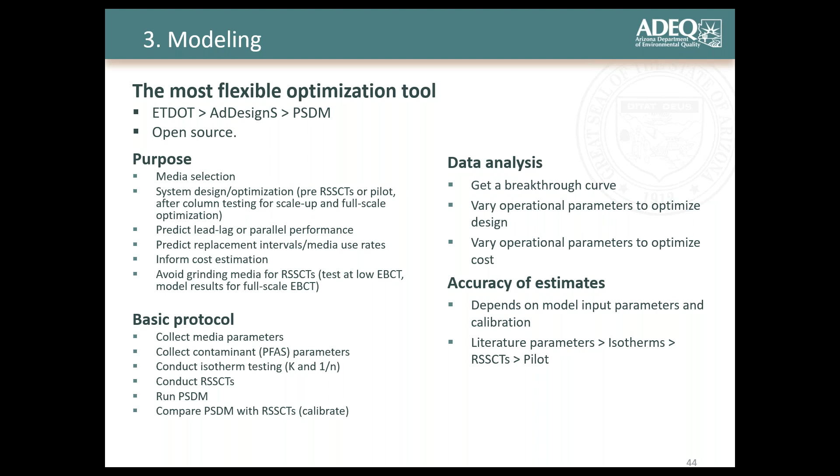And here is the link where you can download the ETDOT software from the EPA website together with a video tutorial. It has many good details. I really recommend watching that. There is also a link that can give you additional Python codes that you can use simultaneously with the model, because the model itself, without Python codes, I think, does not support lead-lag design, but with the Python codes, it can do that as well. And as I mentioned before, if you get some extra time at the end of the presentation, I will be happy to demonstrate how this model works.

So finally, after testing, we are at the ATC step, which should be straightforward if you completed all previous activities. For ATC, for PFAS treatment, you will have to submit an application, design report, construction plans, startup plan, process monitoring plan, and O&M is recommended in this case because even though it's a requirement to be with AOC, still we are in a very new area here, so it's better if you can provide that with the ATC application. These provided documents must be for the final, not preliminary design, so that after approval, construction can start, and after that is done, you can collect testing results in line with the approved startup and process monitoring plan.

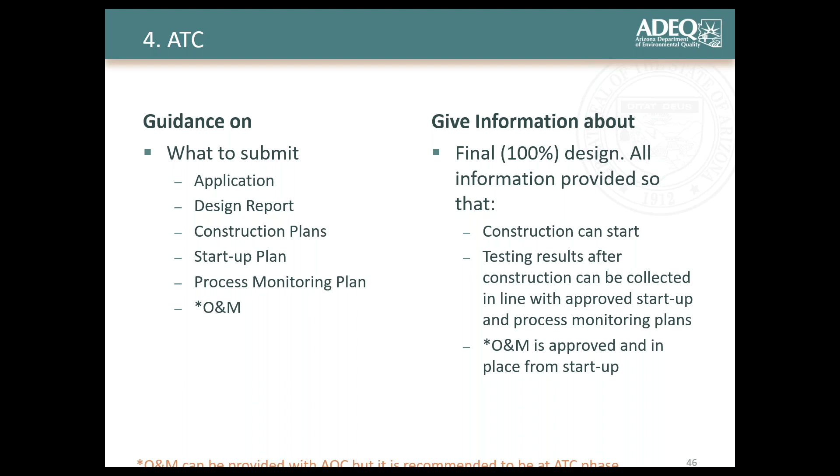So let's talk a little bit more about the design report, because it is the heart of any treatment project. I listed here at a very high level what information it shall provide. The design report should definitely explain the rationale for the proposed treatment process. But if you're a small system, your design also should say that you considered non-treatment options and explain why that is not feasible for you.

Design report should provide testing results and anticipated treatment capacity. It should describe how the proposed treatment will be operated and monitored. And then it should address all waste streams. So you have to have a management option for each of them.

Then your design report has to discuss estimated cost for treatment, but also what is anticipated for O&M cost and how that is going to impact water rates. Eventually, it also has to explain project funding. And so just a few words more about this cost requirement.

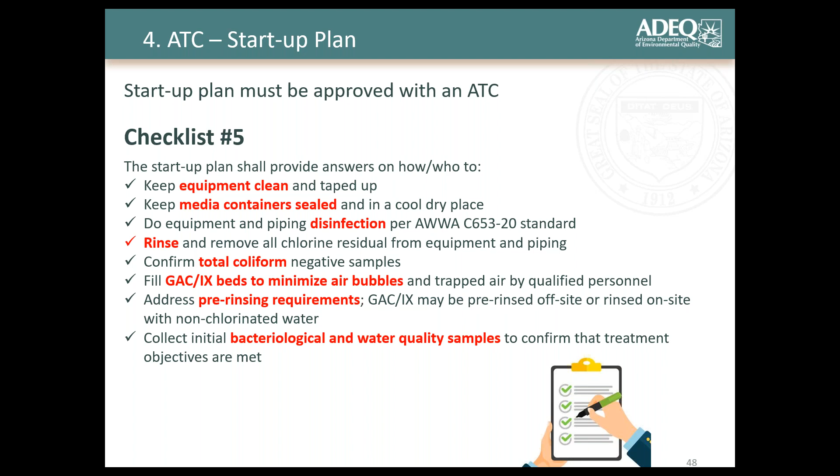Then we have the O&M plan, or plan for current and future operators on how to operate the treatment plant. O&M shall specify treatment objectives. Then it should describe the process monitoring scheme and have a list of contacts as well. So you have to know who to contact if you have a normal operation question or you have accidents. So you have to have a contact for equipment, but also for media support. And then very important, O&M has to explain procedures. So what you do in case of normal operation, what you do in case of troubleshooting.

And I will just list all of this because it's very important, to give you an idea of what we consider should be here. So how you remove your media, and then after you remove, you fill up a new media. How you are returning treatment vessels to production. Then how you are collecting samples, but also what you are doing if you have BACT positive samples. So what is your O&M procedure in that case? What if you have biological fouling or premature breakthrough?

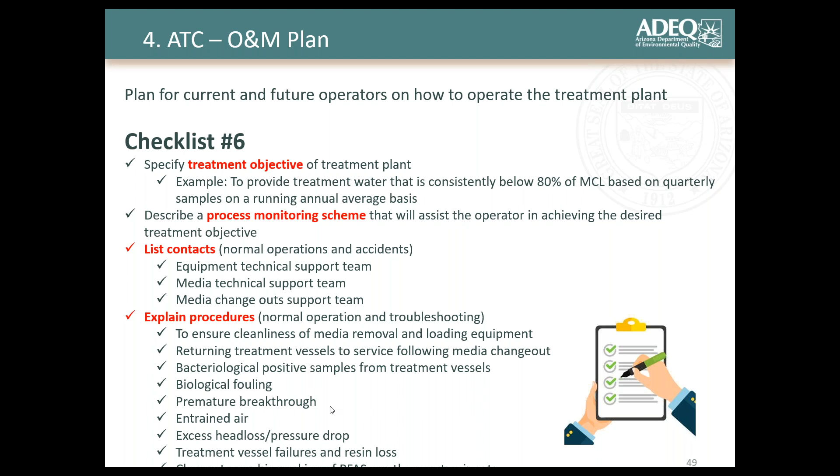Another plan is the process monitoring plan that tells the operator how to monitor treatment performance. And at the very basics, it should explain differences in manual grab samples and automatic sensors monitoring. So if you do manual sampling, you have to know what to sample, where, how often, but also make a difference what is analyzed with field tests and what is analyzed in the lab. If you have sensors, you have to know all of that, but beyond that, you have to be aware if those sensor measurements are going to trigger your alert. So how do you know that something is off? And then, like with any sensors, what's your calibration schedule here?

Then if you have a small water system, you can focus your monitoring on that midpoint between lead and lag vessel. It will give you very good information. But if you have large water systems, then you have to do beyond that. So you really have to sample at many points on those different sampling ports to see how your mass transfer zone is moving.

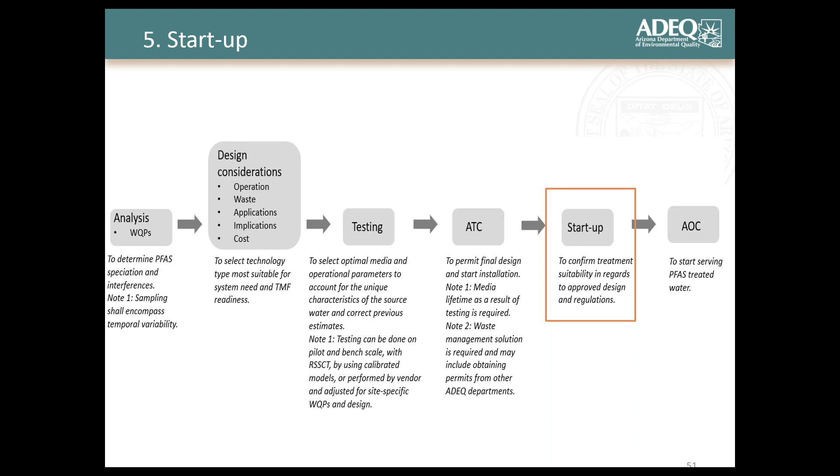So after ATC is approved, construction can start and be followed by startup. In short, the purpose of startup is to confirm treatment suitability in regards to approved design and regulations. So you do not come to ADEQ for this step, because the startup plan should be approved with the ATC permit. Instead, you collect the startup data that you then submit with your AOC application. And then an AOC approval is the final permitting step.

And for that, you have to submit the application, as-built and tests. And these documents should provide information about the final design. So if you have some changes, you should provide justification. Be careful here, because the rule says that you have to communicate any changes that you want to do after ATC is approved. You have to communicate that with ADEQ. So if you don't do that, you are really questioning if your AOC is going to be approved or not. So communicate any changes before you do them.

Then you have to provide that standard set of chlorination, bacti, and pressure results. And then what is now PFAS contaminant in your treated water. Other than that, if you are using GAC, you should show that you don't have arsenic in your effluent water. And if it's ion exchange, you should show that you don't have VOCs in effluent.

Finally, to show that all these requirements that we talked about can be met, I have here a local Arizona example for PFAS treatment that got ATC approval in 2019 and AOC in 2021, which means that it is in operation for the last 2 years. So this system treats 2 million gallons a day, and they have elevated PFOA and PFOS concentration, and as well 1,4-dioxane. They also have a high sediment in their water.

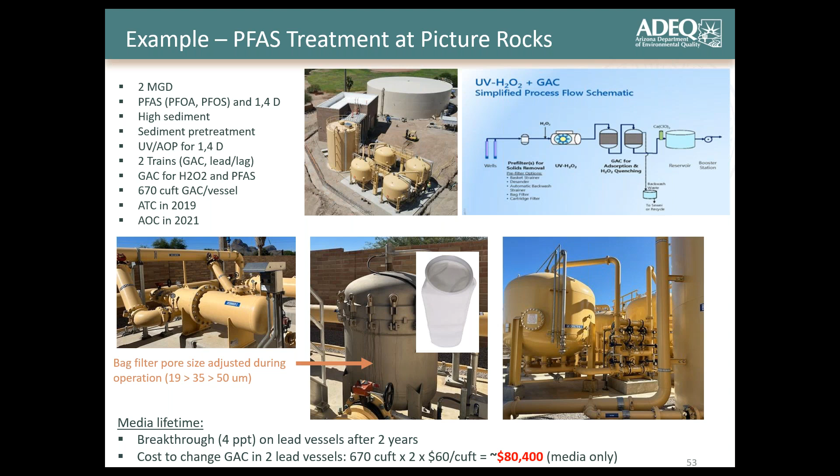So also to mention here that when they do that, they will replace it in lead vessels, the lag will go to lead, but the next replacement will be sooner because those lag vessels are already in use for the last 2 years. And one more thing that you should not forget is that supply chain for GAC is not great. I assume that is the same for ion exchange, but I unfortunately didn't check before this. But what I know is that they will have to wait minimum 6 months to get this media replacement. So this just further amplifies the importance of testing to provide accurate media lifetime, but also non-compliance sampling so that it gives you that safety and time to plan for all of these issues.

And the last topic for today is point of use and point of entry units and their current compliance limitations. So while the approval process is similar to centralized treatment, acceptance of point of use and point of entry units is heavily based on NSF certification testing, which allows that plug and play approach. However, for PFAS specifically, these devices shall not be considered a compliance option until NSF standards are aligned with the MCL.

So beyond this limitation, that will probably be addressed in the near future, it is important to mention that this type of treatment should be limited to 25 connections due to cost-benefit analysis and decentralized O&M cost. And I think that you also saw that in the cost analysis that Tom showed before.

So because we see many deficiencies with this type of treatment, even for other contaminants, it is highly recommended to always coordinate with ADEQ before you start planning for this. And here are a few additional details about NSF certification and why that is limiting current permitting of point of use and point of entry for compliance.

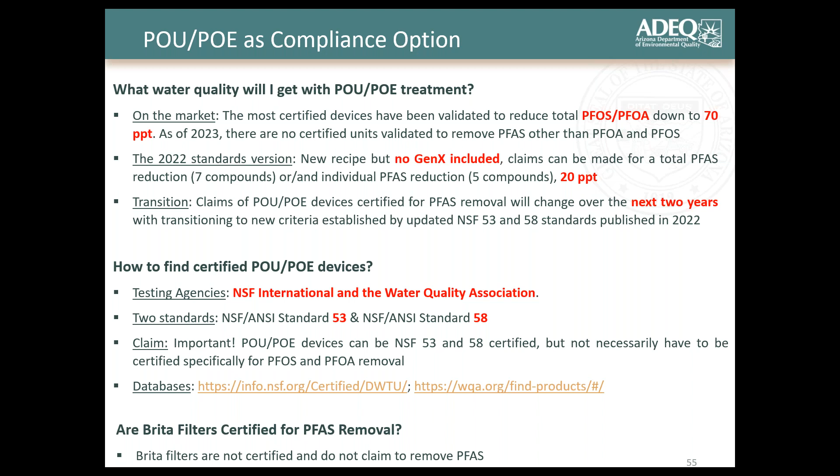These are in the slide. You will see 2 links for databases to check what is certified and for what, but don't expect that anything is certified so far to the proposed regulation, because the standard simply still didn't address that. And then there is a question that I get very frequently: are Brita filters certified for PFAS removal? Well, the answer is no, they are not certified and there is no claim. So they may be removing some PFAS, but there are no testing results to support that.

And in addition to this and other PFAS trainings that are coming, I want to say that ADEQ is working on a few documents to further support all this PFAS effort. And here is a list of documents that are coming soon from us. So you can expect to find selection and permitting guidance documents for centralized treatment, but also for point of use and point of entry. And as I mentioned before, we are working on updates to the existing EPA calculators, just to make them more Arizona specific. But you can run these calculators for both non-treatment and treatment options for PFAS.

And then we are also working on protocols, or let's say best practices, that will help you to run tests, including isotherms, rapid small column tests, pilots, and also how to run the ET-DOT model. Then we are also working on decision trees, again to help with the selection for both non-treatment and treatment. And eventually, in the future, we will try to provide a list of facilities and corresponding cost for residual stream disposal. We will probably wait for the final rule to be in place for this, but this will probably include Arizona, but also go to neighboring states.

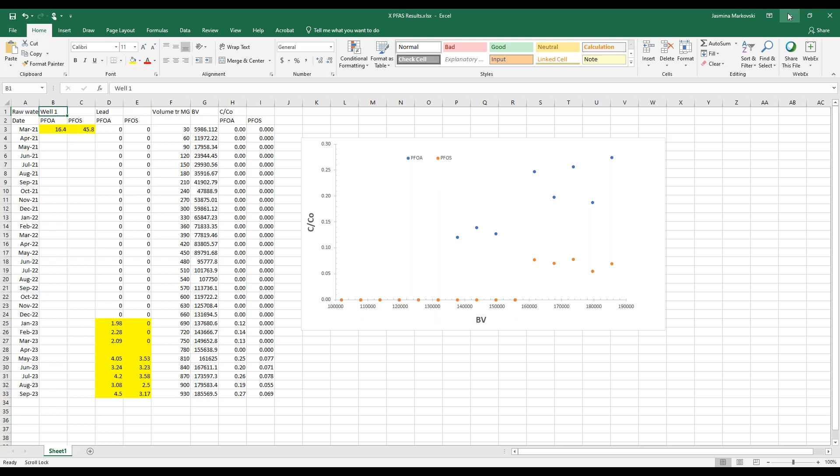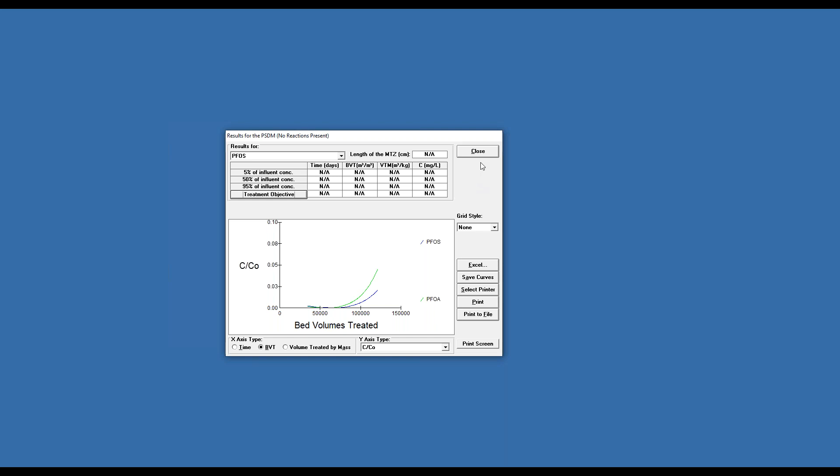But again, this is only a simulation, and it might be that when I put in parameters for PFOS and PFOA, they are not good. So going further here really makes no sense, because this is just my estimate, not the results that I got after testing. It is very important to have these correct, because if you change this slightly, especially 1 over n, your breakthrough is going to change significantly. And that is what I have for this simulation. I think we can go on to questions now, and then answer everything that you additionally want to know.